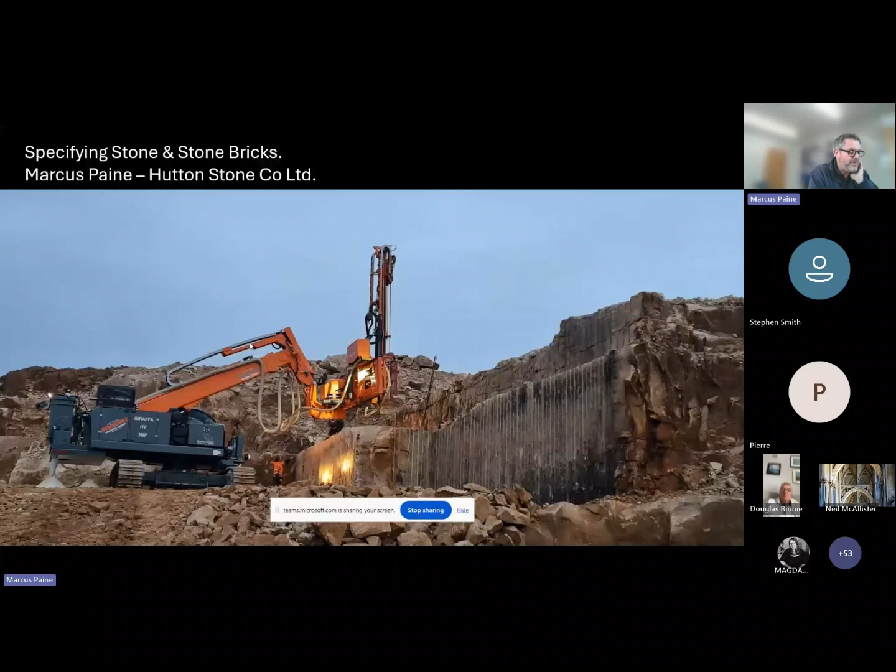Bearing in mind that this is a whistle-stop run through the subject in broad terms, I should first point out that right from the start, we humans have picked up pieces of stone wherever they were available and successfully used them for building things.

This again, in the UK as an example, should you look on any brick-pit map, resulted in an incredible and vast array of historic quarries, pits, mines and extraction sites across the whole of the country, providing us with the vast and varied built history that by and large surrounds us wherever we are and defines our heritage.

These, in the UK and elsewhere, were mechanised and further developed throughout the 18th and 19th centuries, and adapted as other technologies came to the fore, and only faltered and fell away from around the start of World War I, until they were, to a great degree, certainly in the UK, abandoned by the start of World War II, as social, political and other needs changed in conjunction with cheap and plentiful energy - that's cheap coal to you and I - boosting the credentials of other materials.

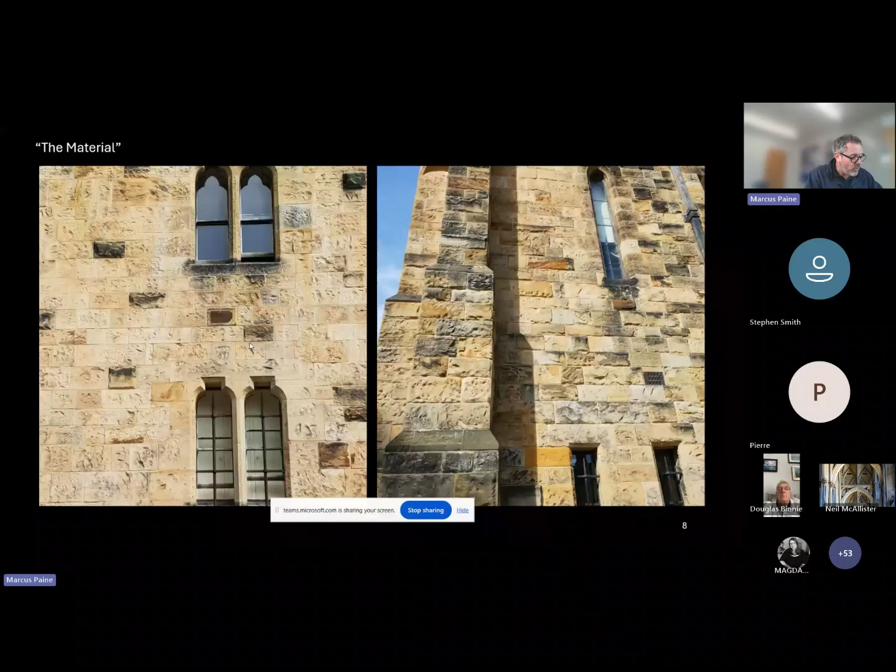These sawn blocks, all from the same quarry, the same face, even the same block, simply show in starkest terms what our built heritage may have looked like when first built.

And yet we know, because we have the benefit of hindsight, that given a surprisingly short amount of time, natural stone weathers in and tones down entirely.

So the lesson for the thrifty, sustainability-driven, enlightened is: when looking at natural variation in new, fresh sawn or split stone, be open to the material being aesthetically interesting or exciting, rather than the 20th century concern that it was challenging or concerning, which led to enormous selecting out and sanitization of this natural inconsistency.

Purposely rejecting nothing in terms of range and variation in a natural product utterly transforms wastage and product cost, and further lowers product embodied carbon score too.

In essence, the material should be judged by the well-informed with the allowance of seasoning and aging, rather than looking at palm samples of new stone and trying to control the outcome of a natural process that rewards the patient recipient.

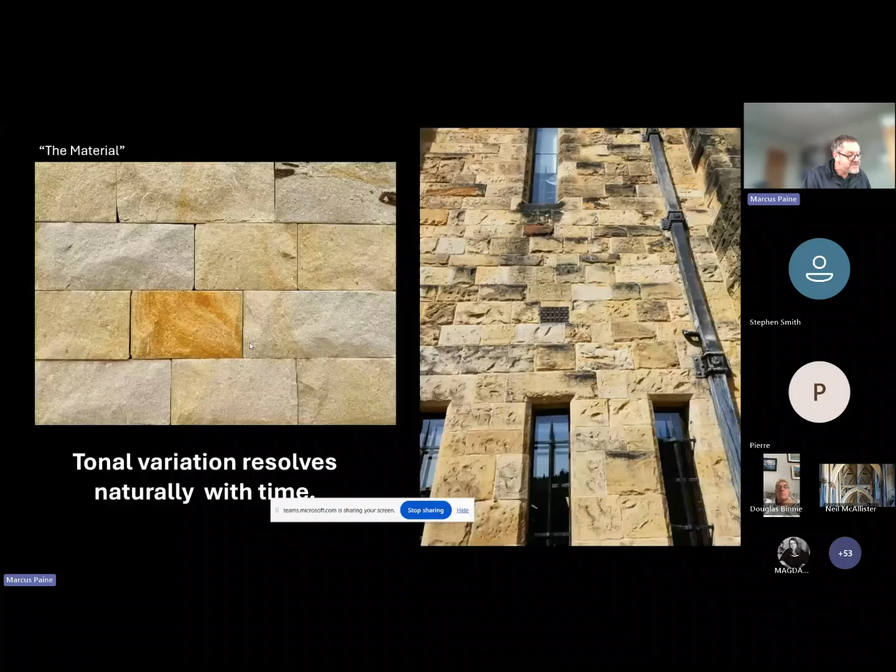So on then to a quick glance at quarries. Some managed to remain open throughout the diminishing of the industry as other products rose to the fore.

As stone has latterly found more popularity, albeit as a clean, thin veneer on more modern buildings, other quarries have again reopened. A small fraction of what previously existed, currently around 300 in total in the UK at the moment, but most with a long proven track record.

In Europe, it should be noted that whilst we in the UK chose to continually develop our taste for man-made options, the French in particular chose to revert back to using low-cost natural stone as the basic load-bearing material to great effect many decades ago.

This is a nod to history and sustainable material use. If you dig it, use it. Hence ashlar facades and rubble gables and rear elevations. It's all endlessly explained to us everywhere we look in our built heritage.

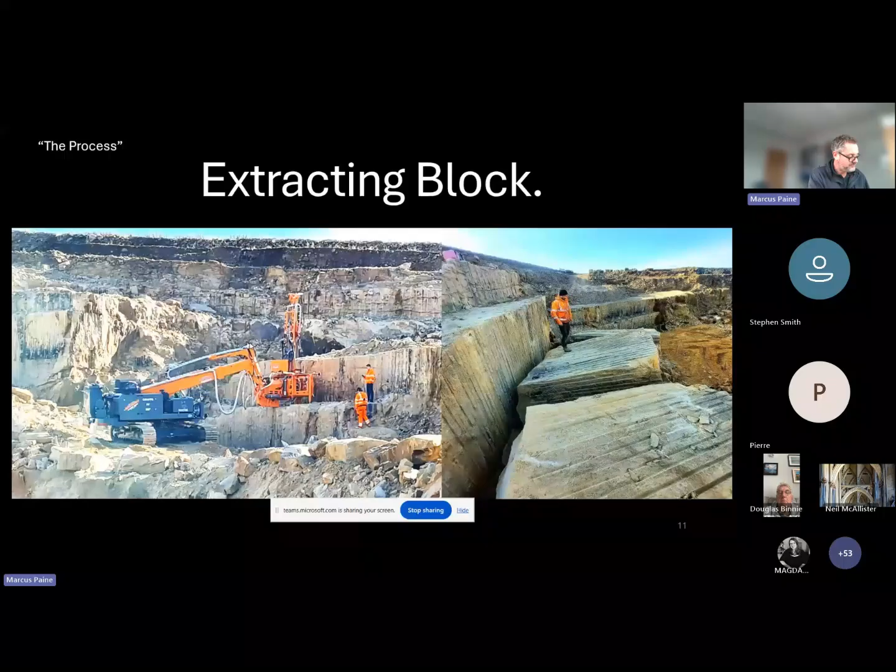Controlled splitting and techniques handed down the trade within all geology versions of extraction are not lost within this industry. It's just that they have not been required for a period, whilst the whole cost of making man-made stone equivalents has simply been irrelevant.

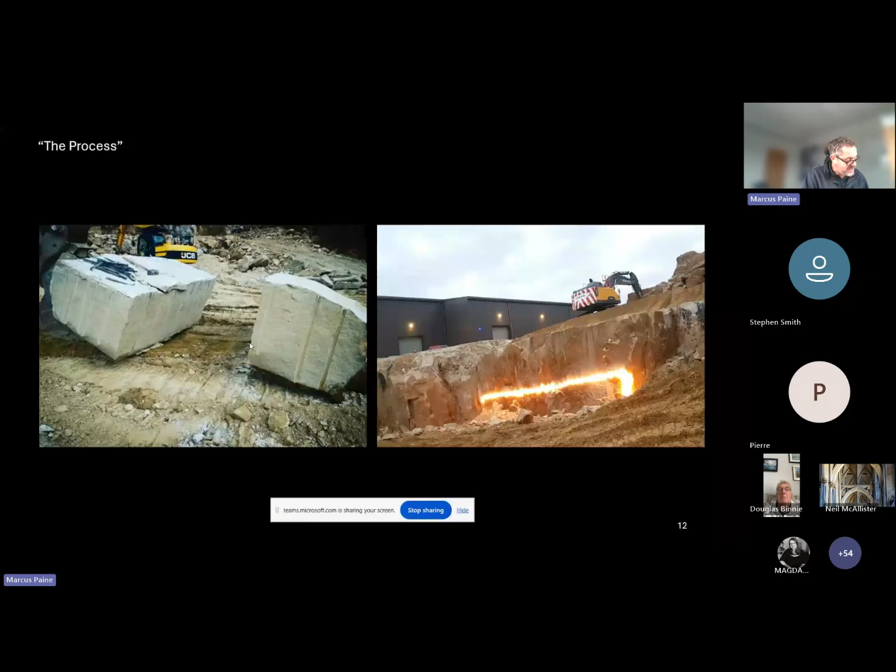Here we see controlled explosive splitting at the exact moment of detonation, which in this case yields a circa 120 ton primary block, and also a block simply split by hammer and hand using plug and feather wedges.

Here, the plugs and feathers shown in action, splitting the stone and the end result.

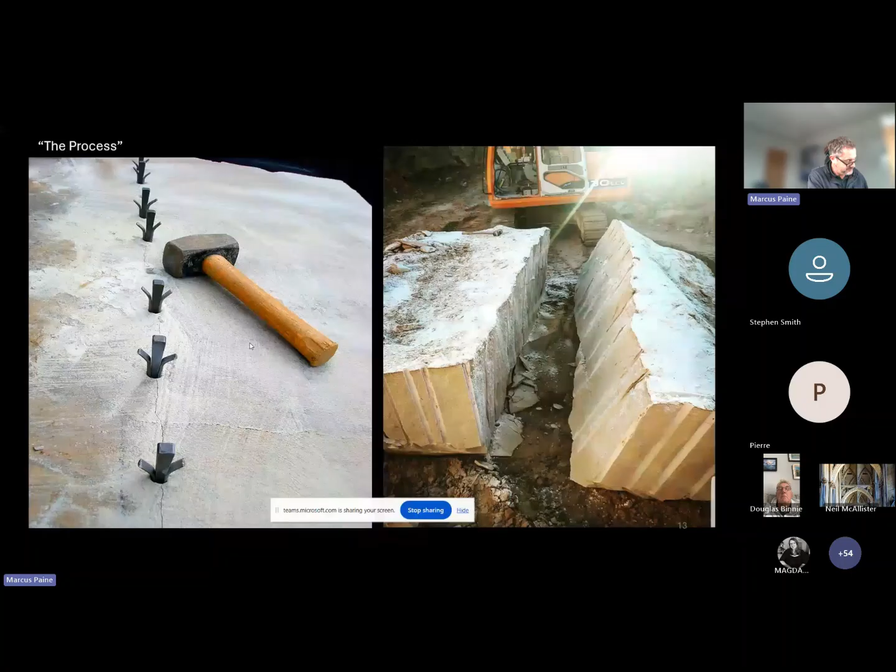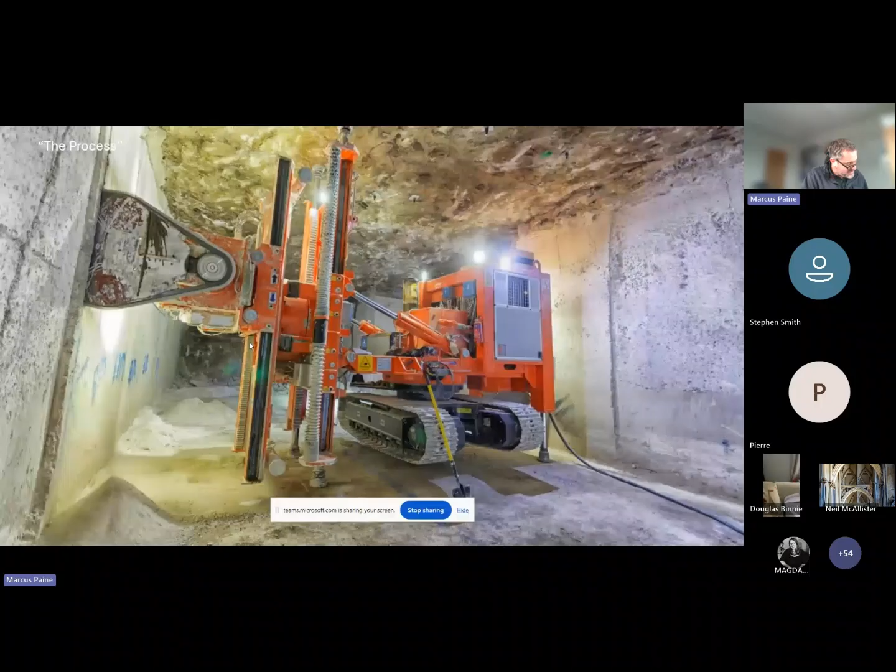Sawing clean base bed directly from the face, but also a host of other beds that are instantly and economically relevant if we accept the perfect imperfection of the natural material.

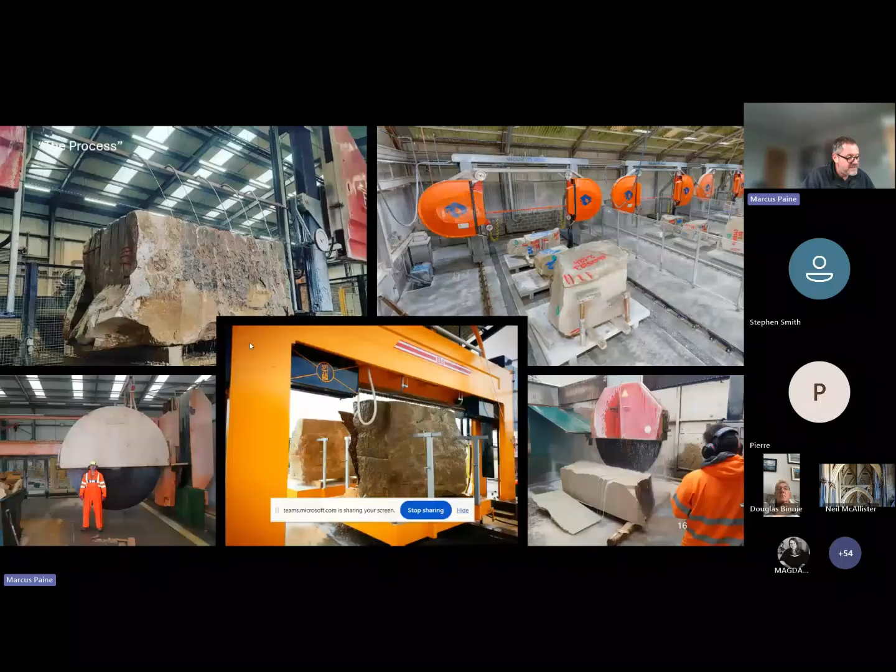Thereafter, blocks are selected for suitability and run through production facilities, producing bespoke and mass-produced products as required.

Primary block sawing—think of it like cutting an uncut loaf of bread from the baker's and making it into a sliced loaf. Economical wire sawing, now including complex CNC options, is a modern feature of our industry, aptly demonstrating how every block, big or small, is used for its appropriate dimensions. No waste—always the fundamental industry target.

And then with these slices or slabs of block, we turn them over and lay them on smaller secondary saws to either cut to final square dimensions or mill and shape as required.

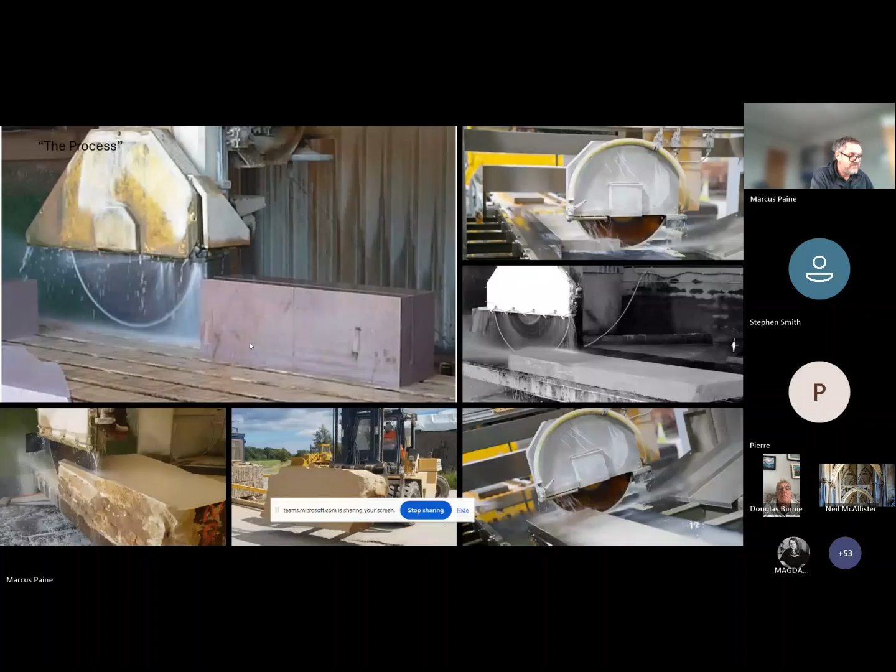Masoning: architectural features used sparingly but functionally to throw water away from the building. Surface dressings, often critical in heritage work, again perhaps used very selectively as a simple method of creating a front door definition to a building.

And of course, carving for those special pieces, all part of the story—sometimes now by CNC, but always where necessary by hand is of course still possible.

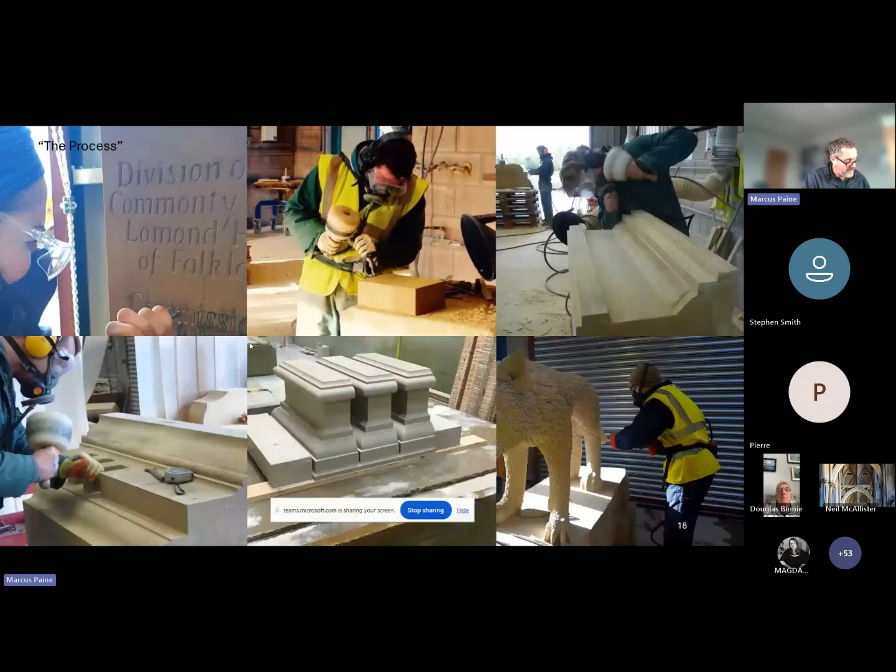And so that's where we are: in many ways a declining industry, hooked and feeding on endlessly bespoke niche items and restoration. My friend and colleague Pierre will elaborate on why and how the outcome was somewhat different for Europe.

And it leads us to understand why a few of us, somewhat disillusioned with the current status quo, chose to think outside of this box and align the principle of a mass-produced natural stone brick as nothing more than the 21st century version of a piece of Victorian rubble walling, in an effort to align concerns for our climate with our almost forgotten natural material in its most utilitarian form and how we perceive it going forward.

In terms of specification, and in the current construction cycle, where cost and specification is often manipulated, this bespoke nature of what we are asked to do is often at odds with the program or the control of it in any project.

We would simply say that in terms of specifying natural stone for your project, embrace the ideals and lessons of the arts and craft movement. Understand the material, engage early in the process with your chosen supplier. The nearer you can get to the source, the more likely you are to retain control of schedule and cost—and the more people you have in that supply chain, the more likely you are to be frustrated.

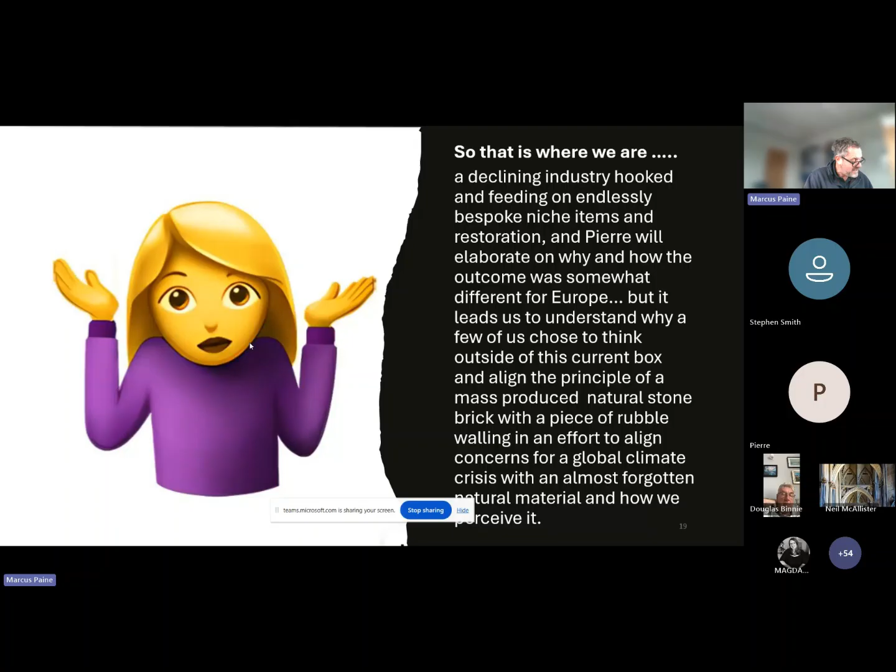So the stone brick journey was initially inspired by hearing Pierre and Amin Taha on a Stone Federation talk chastise the UK stone industry for its failure to develop and its inability to be competitive with imported alternatives and man-made options. Whilst I observed many of my contemporaries smart with indignation at the suggestion, I, having spent my career very much in the thick of it, felt this really resonated with my feeling that my industry had sleepwalked into this perceived position really since the World Wars, where we societally rejected much that had gone before in favour of various high input, quick, convenient economic alternatives that ultimately also led to short-termism within our buildings.

And whilst that was in many ways fair enough, it had no reason until now to consider the climate outcomes of the high input energy needed to create the products that gifted us the way forward.

It really was about embracing the idea that the mass production of one building unit, which the clay brick industry had so successfully done, and in so doing had eclipsed the natural rubble walling market almost entirely, could, as an entry point, reinvent the general perception of natural stone—now not just for the beautiful bit of a building, but like rubble before it, for the most basic, cheap building element and low embodied carbon too.

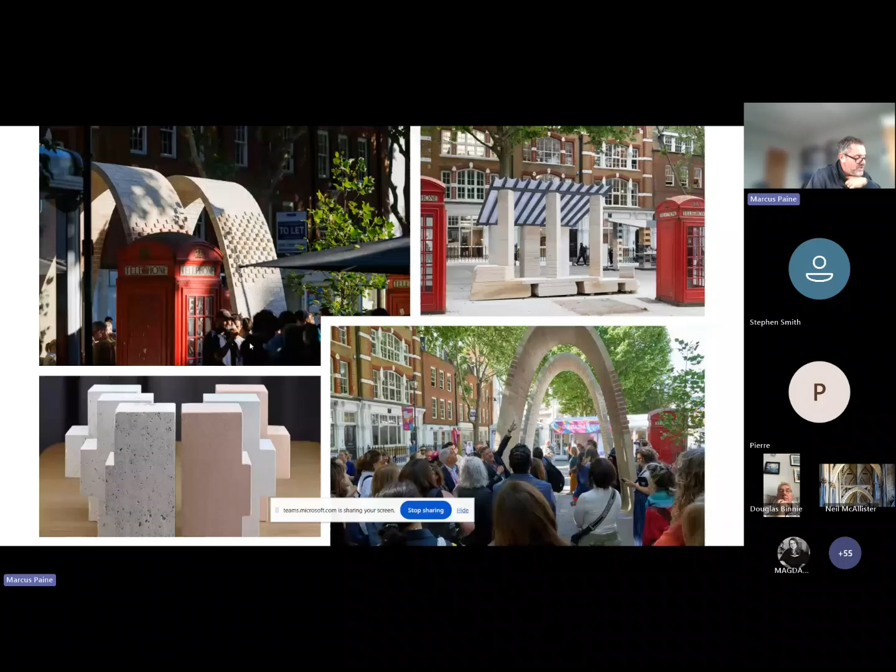We hosted and supported many talks, tours, visits, and collective groups supporting student learning and studies, and simply broadening the conversation away from the current perception that natural stone is an elite, high-end, expensive luxury. That is only one part of its story, and the rest was simply forgotten during the remains of the Industrial Revolution and the 20th century.

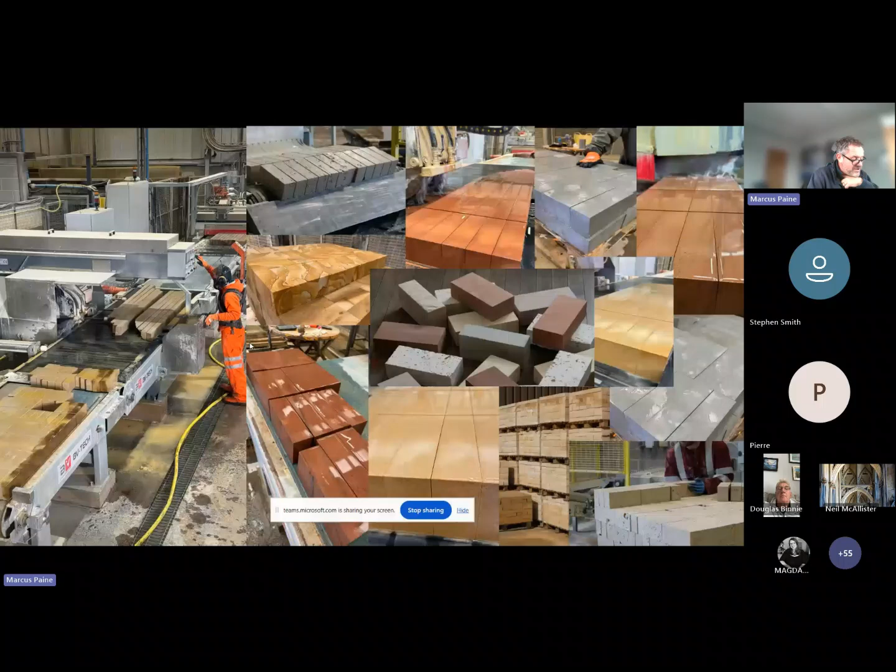We invested in significant new equipment and developed engineered solutions to create lines for mass production as close to mineral source as possible, to ensure that costs ultimately will be low through economy of scale. And we have begun steadily progressing some really interesting projects with clients, mostly inspired by both the exhibits and the growing conversation throughout the architectural and construction industry.

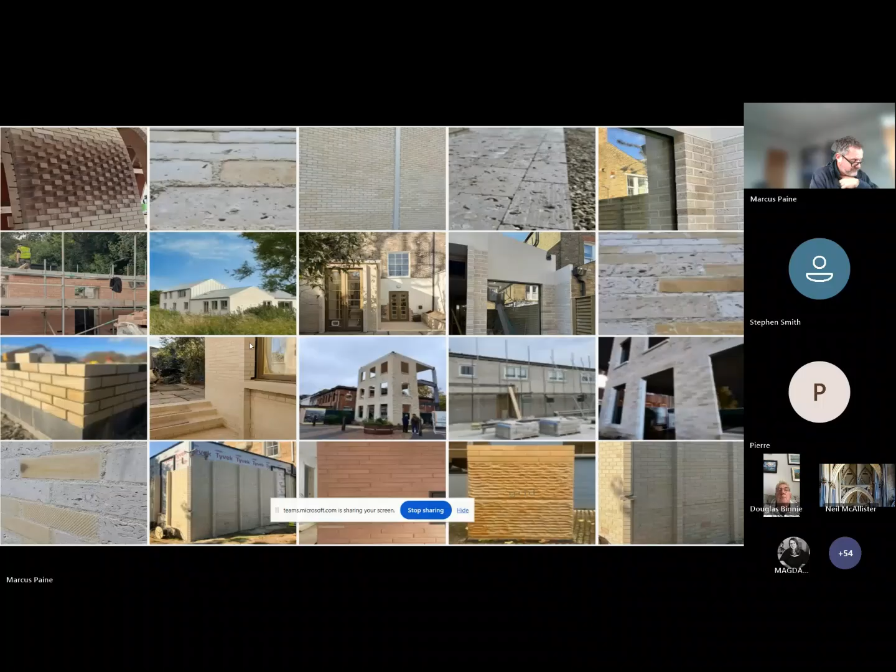With inspiration from post-war Europe and occasional load-bearing examples built in the UK over the past few years, and of course Groupwork's Clerkenwell Close and Finchley Road extravaganzas, plus the recently unveiled design centre Earls Court Stone Demonstrator project, built with a 90% reduction in carbon by Pierre's Stonemasonry Company, using natural stone exoskeleton beams, floors, and clad in UK natural stone bricks to demonstrate the future in natural stone.

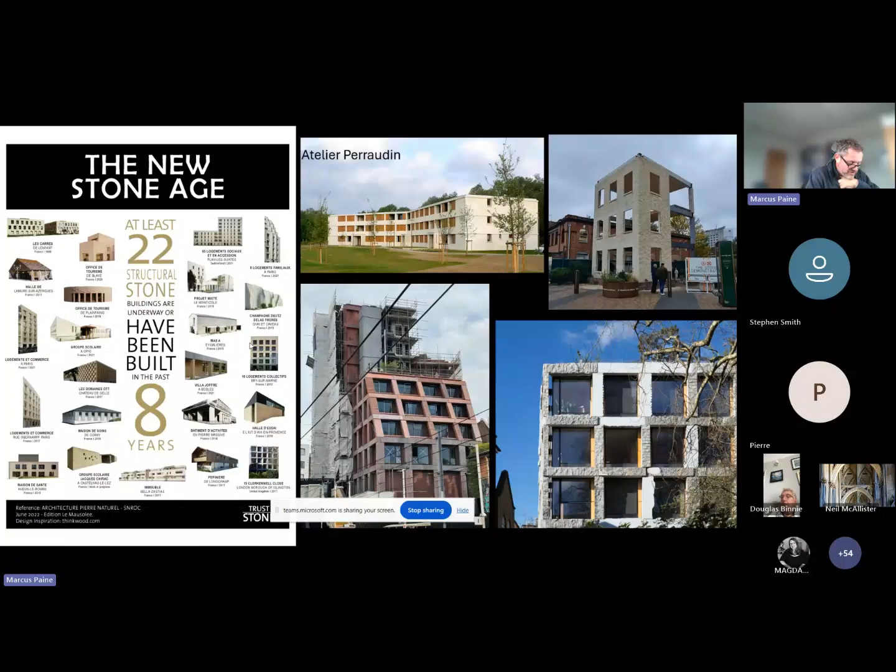We feel that a new generation of perception continues to grow. And we thank you all for allowing us to share this further with you today. Thank you very much for listening.

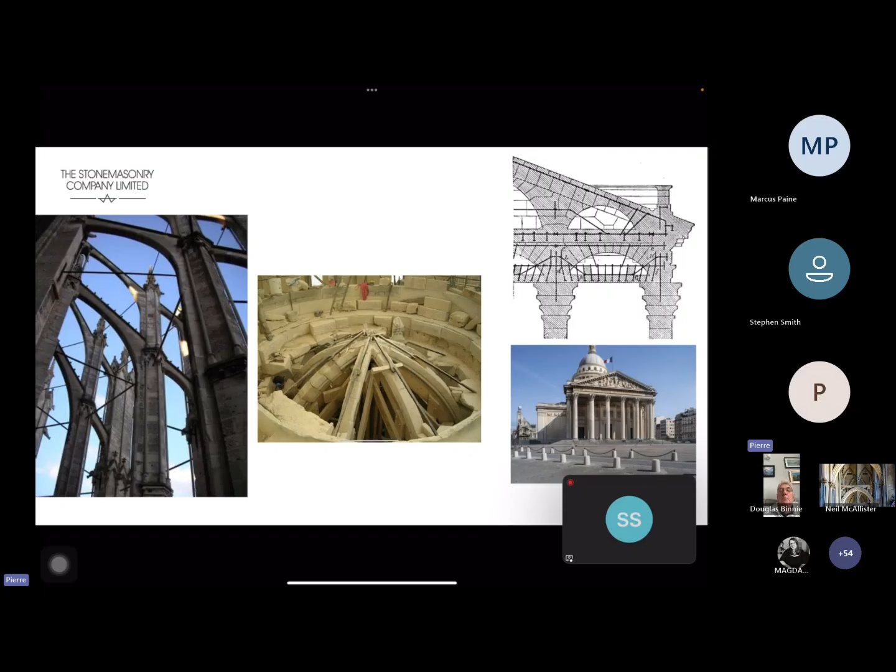You can see on the left-hand side the back of Beauvais Cathedral with iron bars stopping any wind loads from toppling the flying buttress. You've got an interesting placement of iron rebars in Château de Vincennes. But also, if you go to Paris and visit the Pantheon, you will see as well a network of reinforcement using rebars made of iron at the time, showcasing how people started to see stone as a material that could be reinforced with other material.

And here I can introduce you to Mr. Freyssinet. For people who don't know him, he is a French engineer who decided to push the market for reinforced concrete using post-tensioning of cables into a concrete structure, whether floor slabs or bridges. The system is very simple: if you take a lump of concrete or a lump of stone, they are both very similar systems, meaning they work very well in compression.

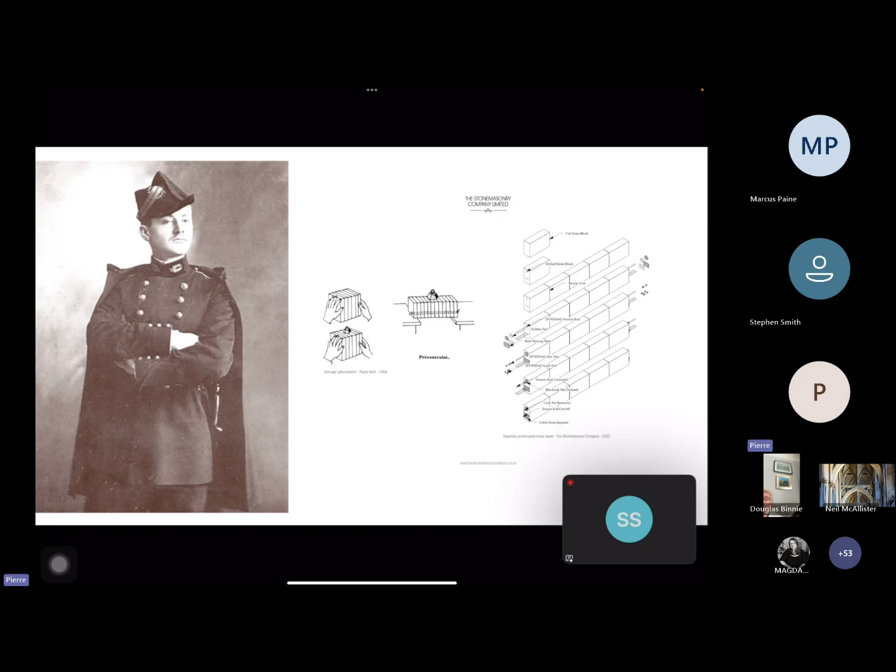So if you can do that with concrete, why not do it in stone? As in the very last pictures on the right-hand side, you can see the sort of system that we put in place and standardized to a point where you could get beams, columns, and so on done with exactly the same system of prefabrication. That was very popular.

That was an idea popular in 1950s France. On one occasion, because of the popularity of reinforced concrete, they tried to make it valuable into the stone industry, and as such, they did an 8-meter long beam in the 1950s with exactly the same premise of having a cable and rebars going all through this beam, tensioning the cable and compressing the material. It went really well.

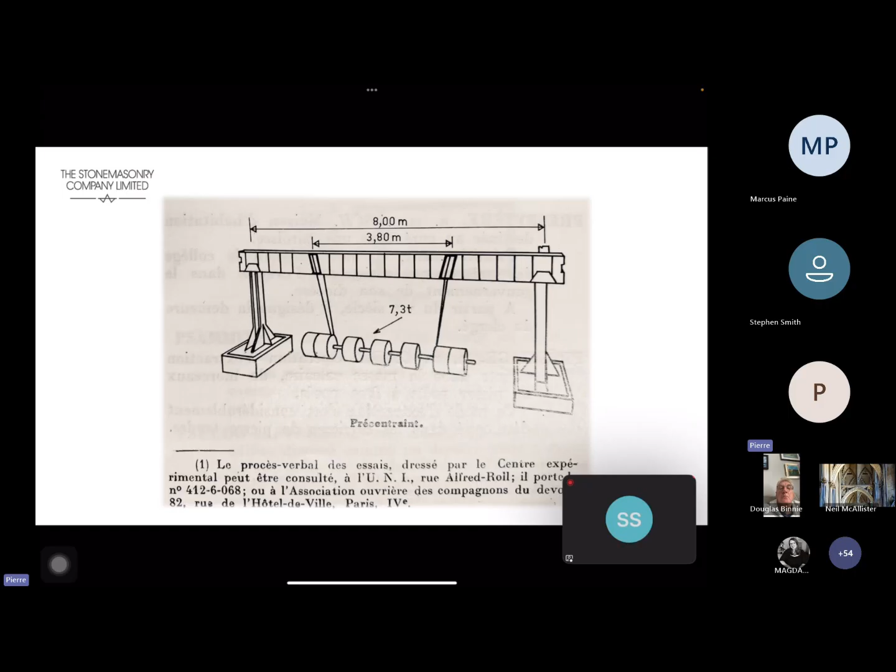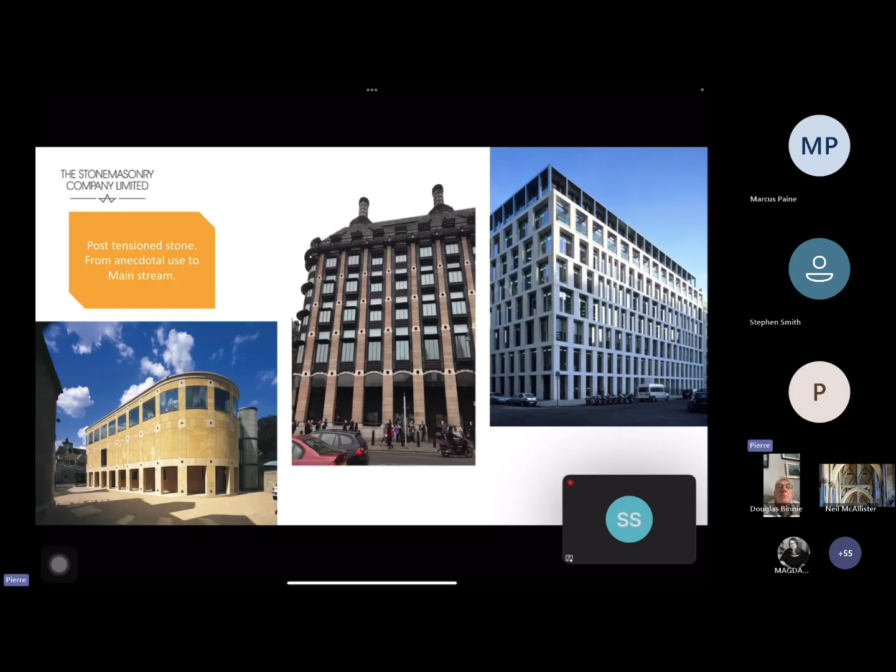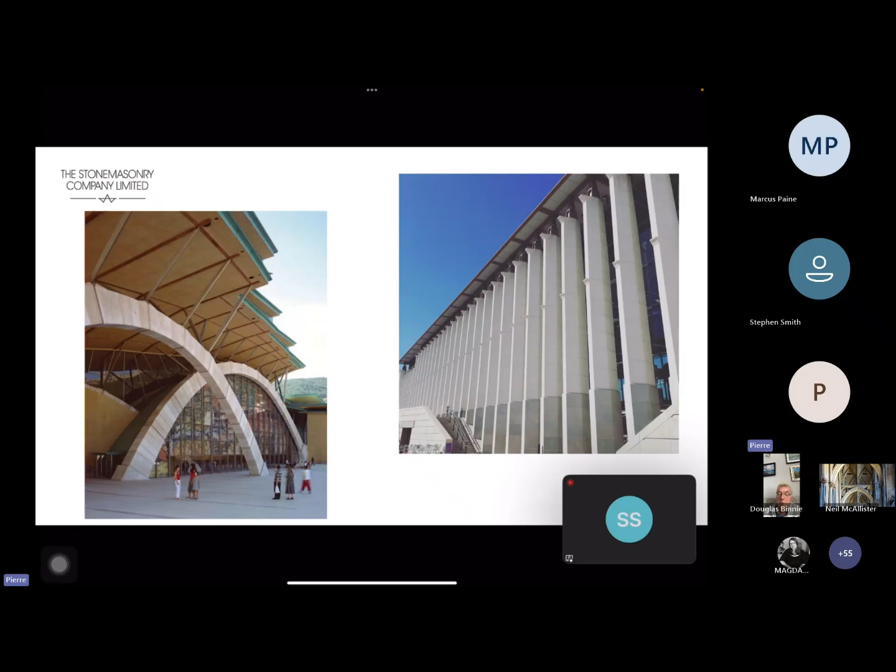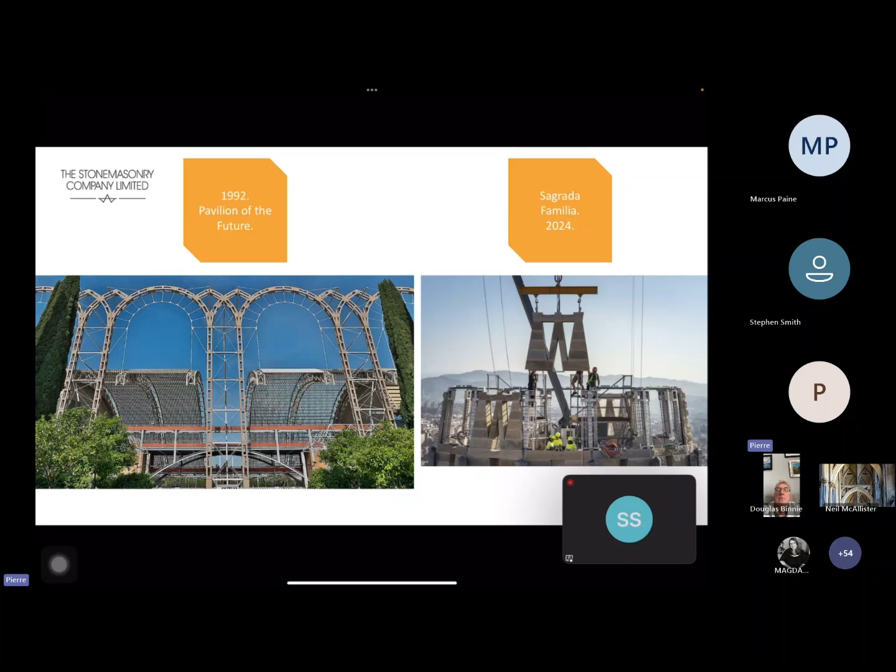And finally, Arup again in 2024, finishing the 7th tower made of sandstone collected all over Europe, again all prefabricated. This showcases how reinforced stone and prefabrication is key to putting stone back into modern construction—stone as a commodity, not a luxury. That's very much something we've been trying to push in the last 15 years.

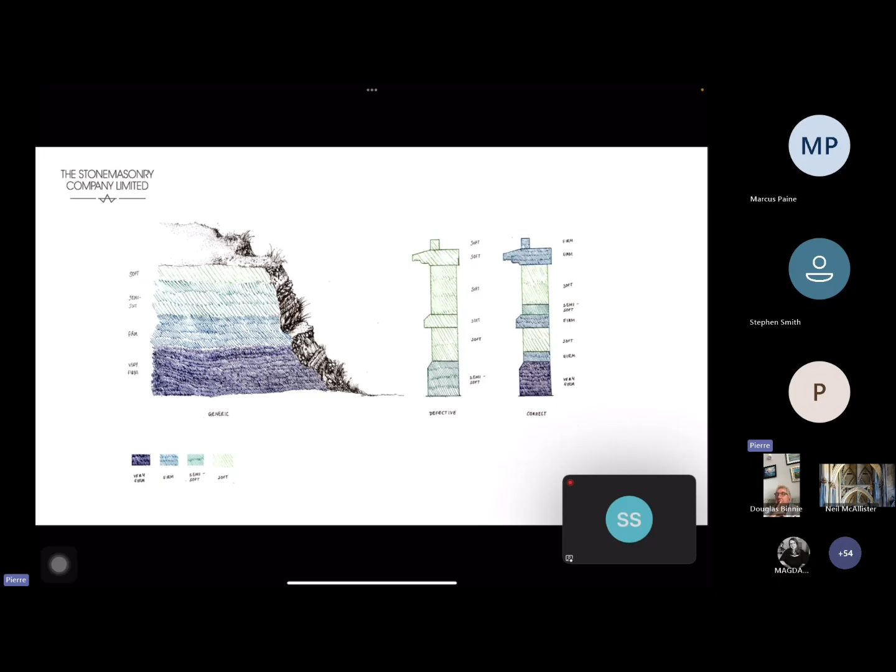I think what's interesting is that when talking about stone, as Marcus was saying, they are all very much local quarries. Pre-1900, architects and engineers used to have very good knowledge of local stone and were very intimate with the material, able to specify that firm stone should go into the plinth, maybe also into the windowsill, but other less demanding parts could be made in a softer bed of that same quarry. Specification is key, and as Marcus was talking about, there's also the aspect of the stone changing from the front of the house to the back, something we've been losing in the last 30 years.

We've been going a lot more for grade A, super-selected material used for surface finishes, cladding, and flooring, either by having concrete getting a lot cheaper, and those other grades—grade B, grade C, grade D—disappeared.

But if we were going to be a lot more intelligent in the way we extract our stone, we could use prefabricated stone for grade B—stone that could be pitted with some veins and so on. Then the large format grade C could be the result of a stone that allows a bigger module. And finally, grade D would be, as Marcus was explaining, making very sustainable brick. With these four grades in place, it would allow full use of the material instead of concentrating only on grade A.

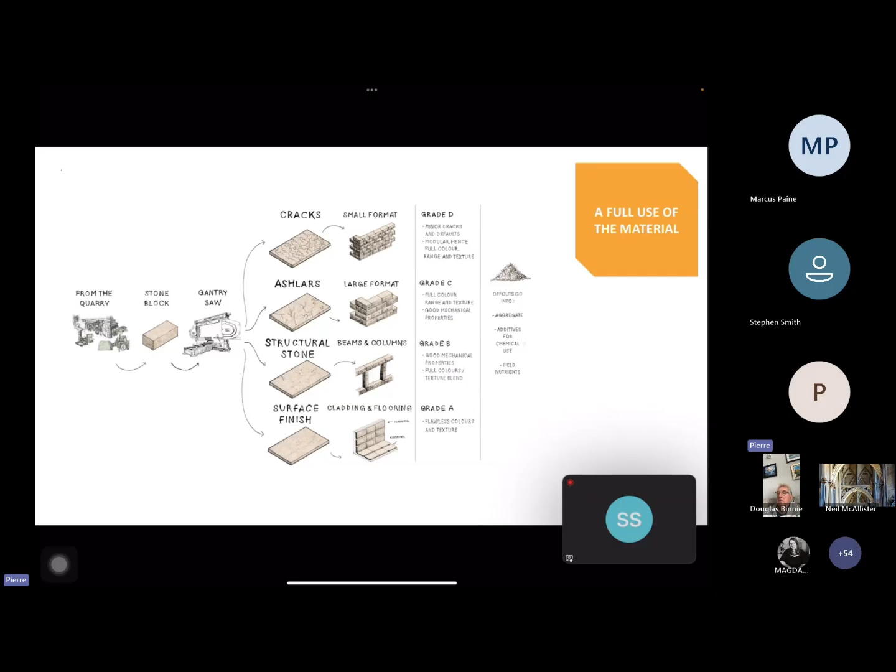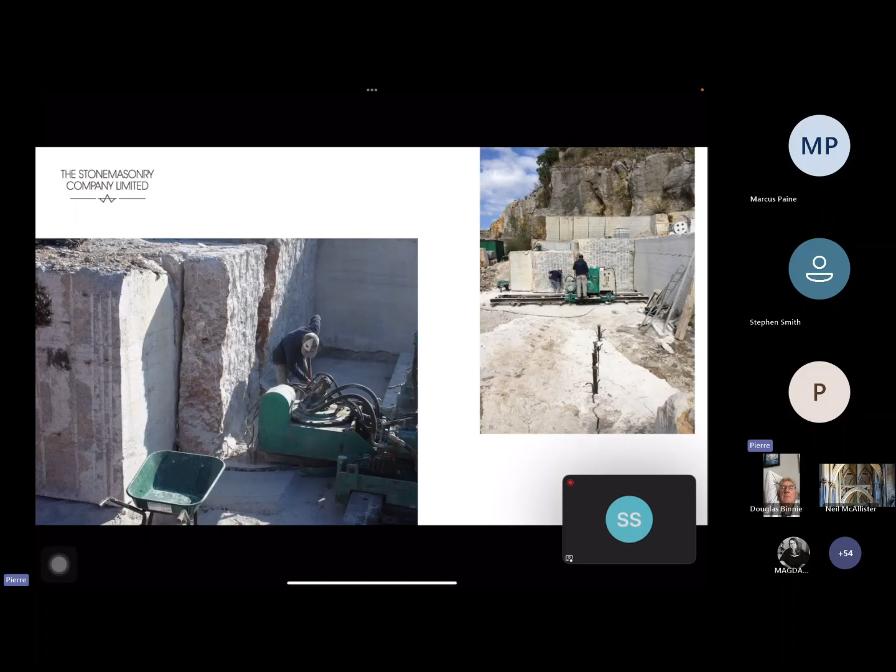And that's very much what we did with the Clerkenwell building with Amin Taha Groupwork in 2016, is that again, we had the possibility to use a quarry where we could get big columns and big lintels, and instead of cutting them in small bits to suit, for example, a local context, which might not be relevant anymore, why not take those columns and those lintels as one monolithic element and just bring them to build an exoskeleton?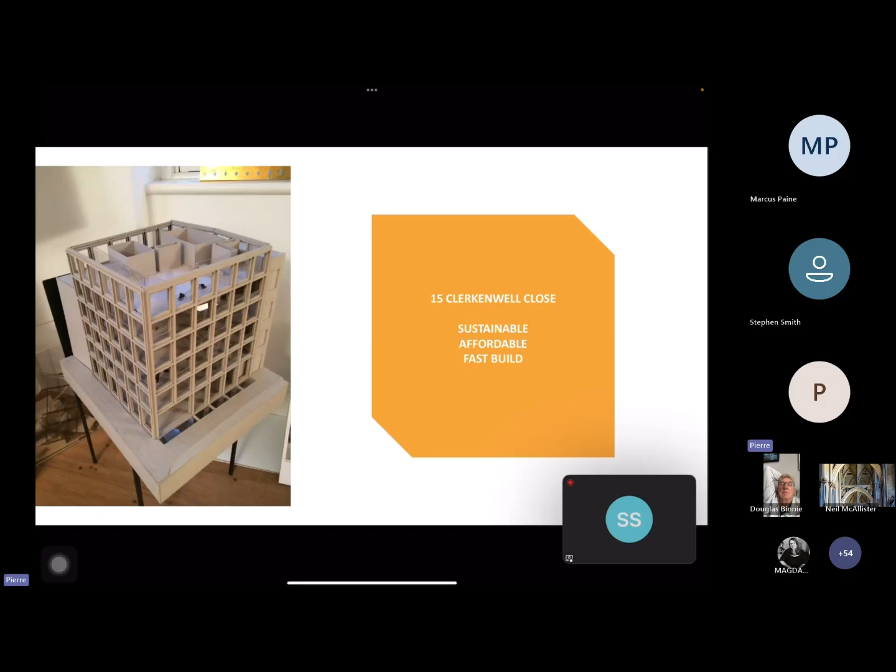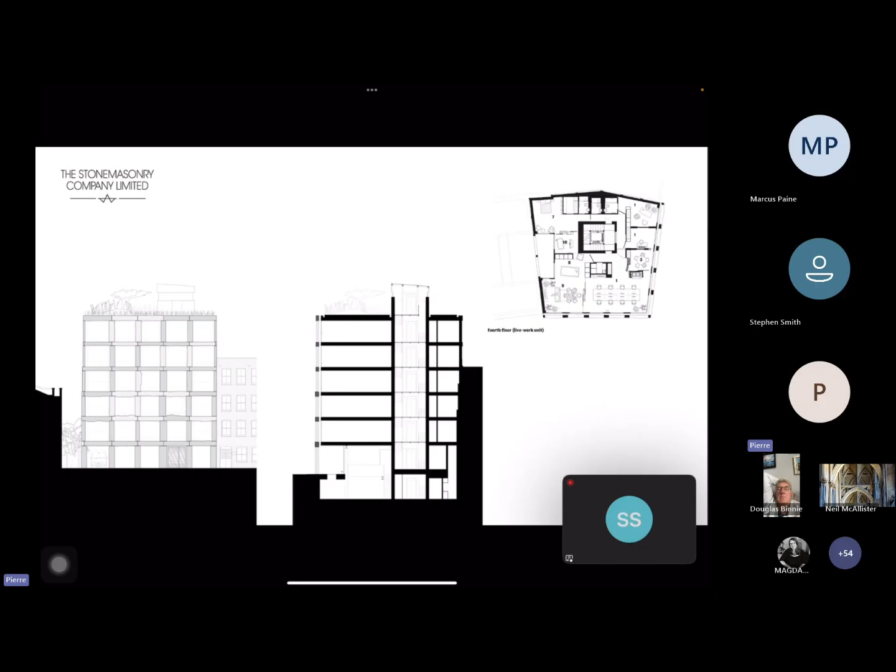And that was the mission that was given to us, to bring a sustainable material, affordable, and that could allow a fast build. So that Clerkenwell building was made as an exoskeleton. So you've got an exostructure, which is all load-bearing stone, and connected at the nose of each concrete slab, which means that from the front of the building to the core, to the lift shaft, you have a totally unsupported structure. It is all held on the exterior by the stone lintels and columns.

And again, to make it affordable, we followed what has been in France for the last 40 years, a material totally untouched after being cut. So as soon as it will be leaving, for example, Marcus' yard or our yard, there will be very little hand finishes that allow you to be a lot more efficient in the present, much more efficient cost-wise when building that affordable scheme or community center.

So on the left-hand side, you can see a French building built in the Southwest, where again the architect has decided to leave the tool marks. They are the tool marks of our time, you know, big circular saw. In the middle, it's a 1950s France building, this simple affordable housing scheme. And finally, on the right-hand side, it's Clerkenwell Close. This is the echo of the blade of the wire going through the stone and just being left totally untouched.

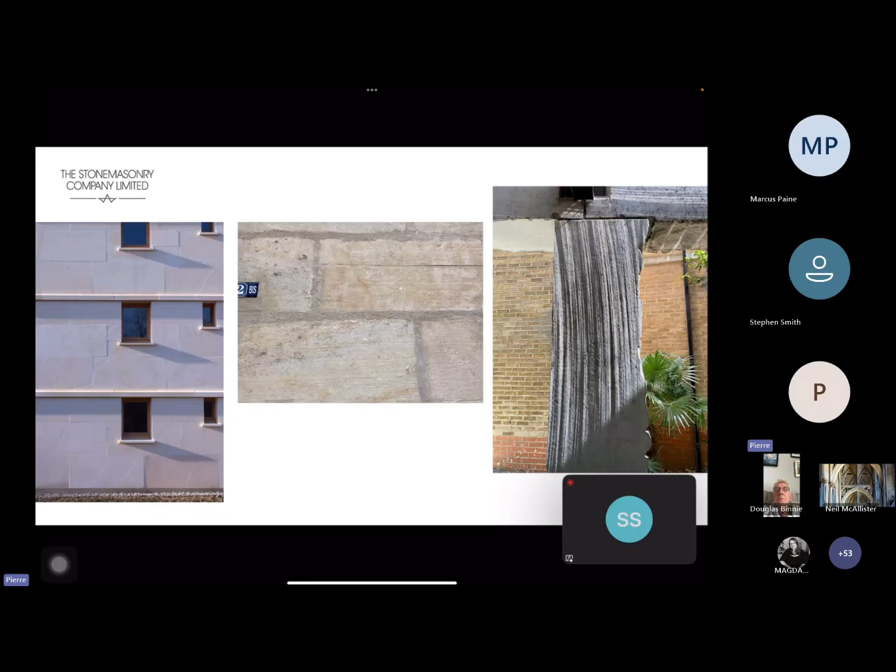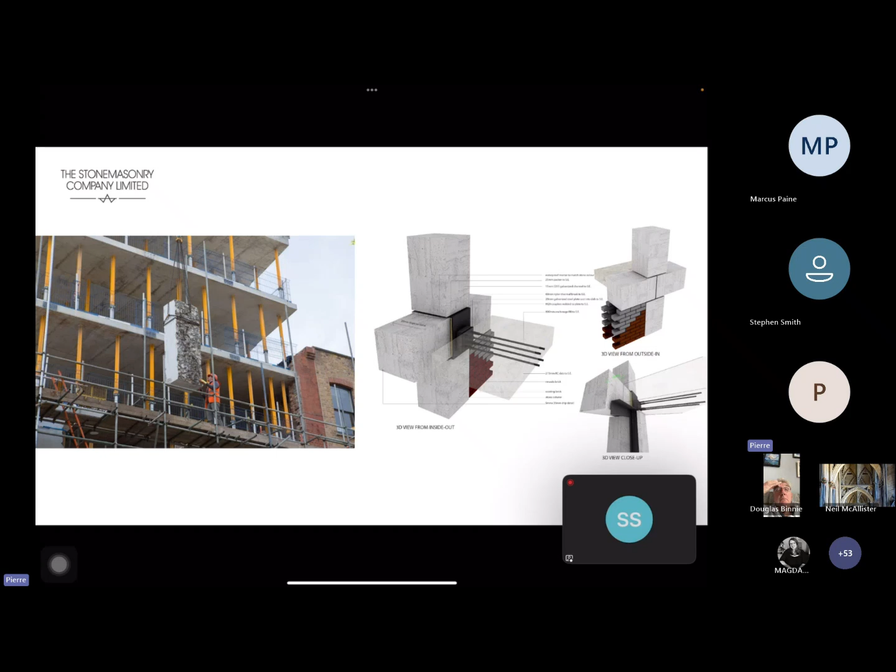So here you can see we've got the sort of natural prefabrication of monolith because these ones are not reinforced; they are just columns coming out of the quarry, and you can see the black box on the nose of the concrete planks, the concrete floor that's going to be connected to the exoskeleton. So here on the left-hand side, you can see the connection from the nose of the concrete floor slab to the back of the stone, and again the lifting of one of the monolithic elements.

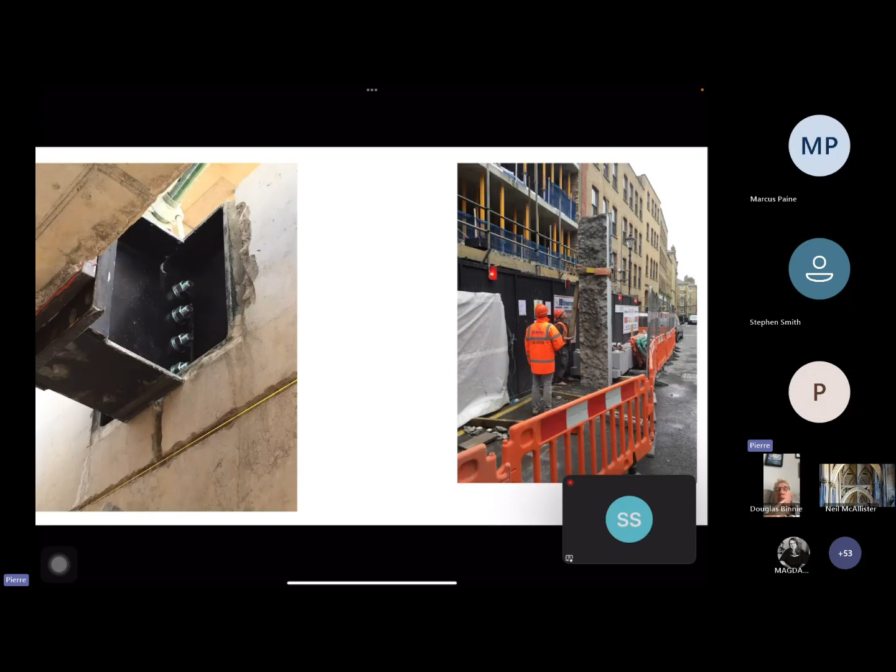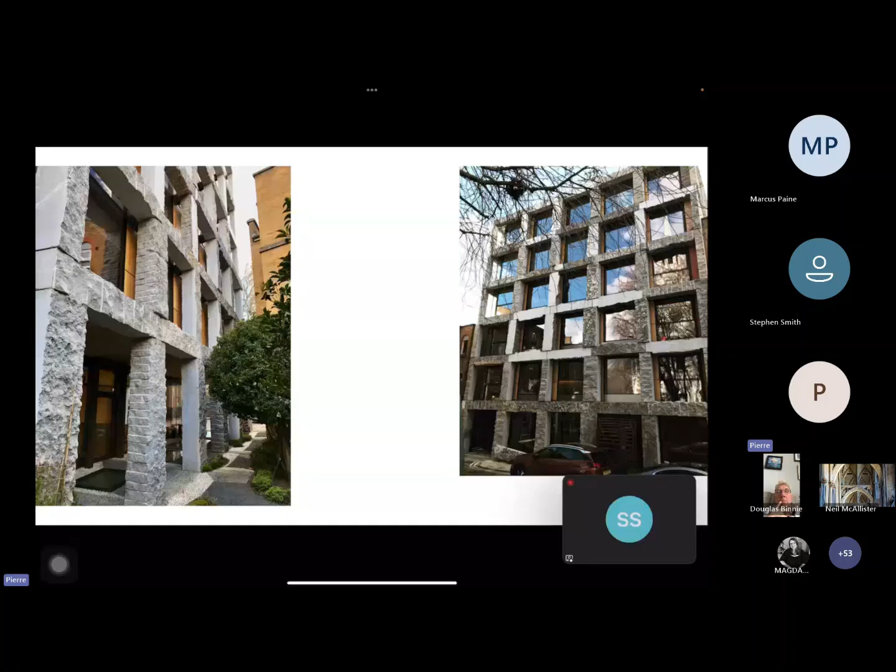So this is a local limestone to Lyon on the Rhône. So here you can see a very efficient use of stone, only 100 cubic meters of stone, which is a very small amount of stone that we've borrowed from the crust of the earth. So again, a very efficient way of building, requiring very little water, because we use mostly grey water in a closed circuit. So that means the mobilization of water is very minimal. So for some key areas where you might have a drought issue, that could be very useful. And here you can see the project in central London.

So I think, again, as illustrated by Marcus, we tend to say humans are made of water, 90% of water or something like that. But I think modern humans are really made of oil. And I think in the last 100 years, we have seen us getting more and more hooked on oil and fossil fuel. And there is an interesting parallel between 1947 France and 2025 worldwide.

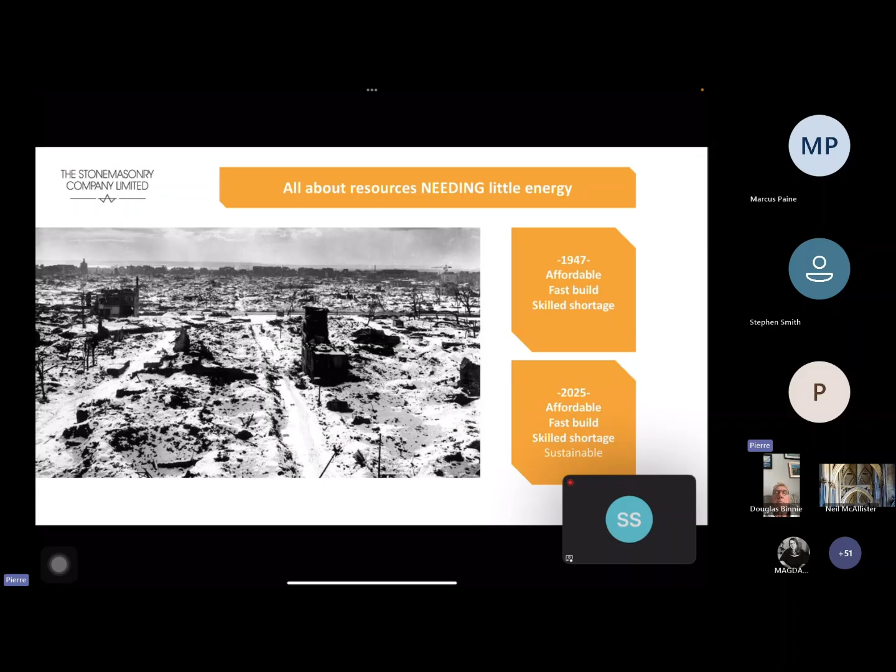In 1947, as we needed to rebuild France using as little energy as possible because it was very expensive, and wanting to use concrete and steel where it matters, which means mostly in infrastructure, building bridges, harbors, tunnels, and so on, they needed an affordable and fast build and a material that didn't need a huge amount of skilled labor force. And in 2025, we are very much exactly there, with this affordable material that could be built quickly with, unfortunately, less and less skilled workforce. And of course, we want our buildings sustainable.

I think all here on the call, we all know how processed our materials are now, be it food or construction material. Everything is over-processed, everything is overcooked, overworked. And compared to letting the earth do that processing for us, why don't we stick to stone? Stone has been processed by Mother Earth in the last 135 million years. We might as well use what is already there, requesting as little energy as possible.

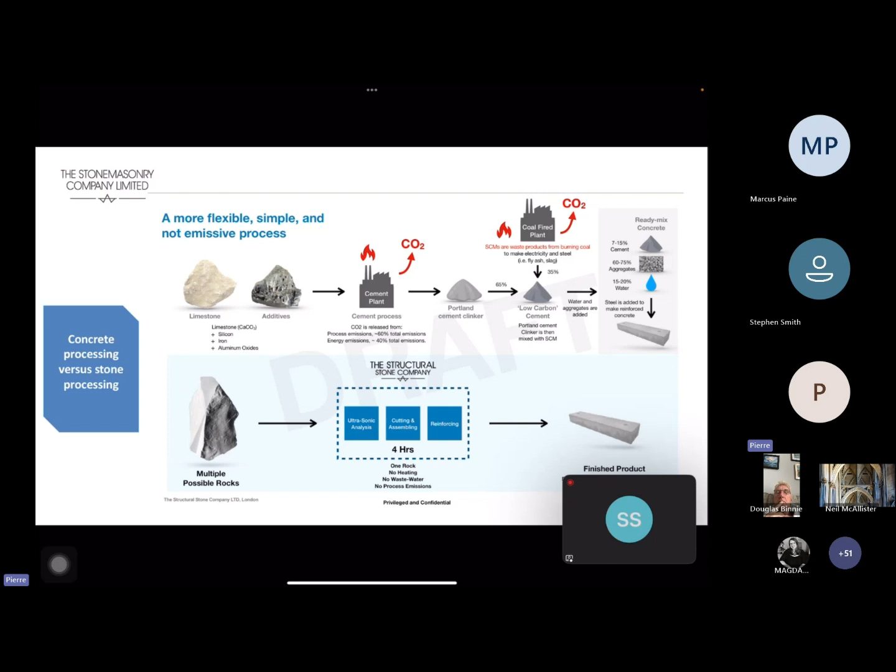And I think that's what happened to France in 1950. They just found out that 225 kilos of coal was necessary to produce 1 cubic meter of concrete, and 10 kilos of coal for just 1 cubic meter of stone, which, when you look at the difference in cost at the time, made it very, very cheap to, of course, build in stone.

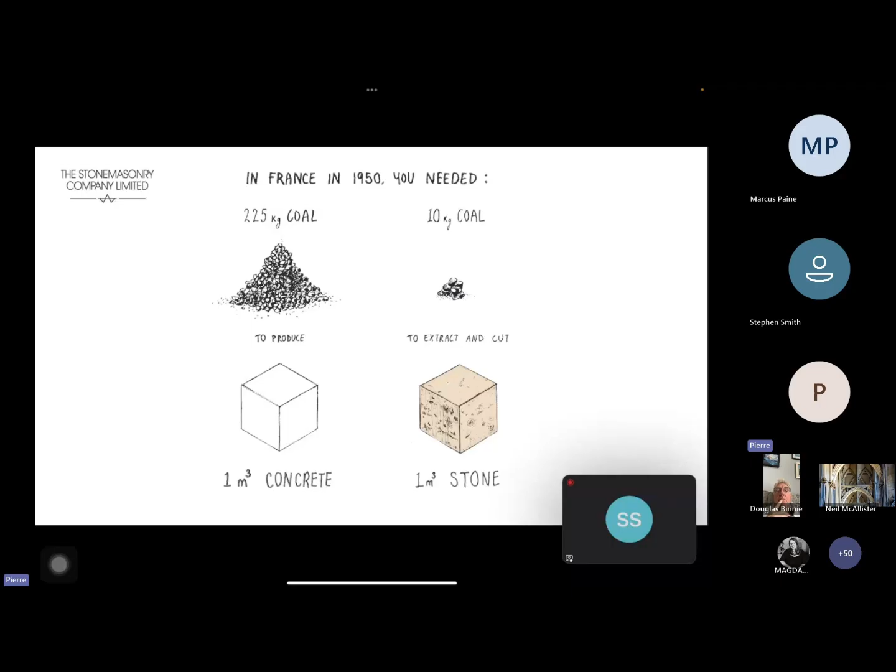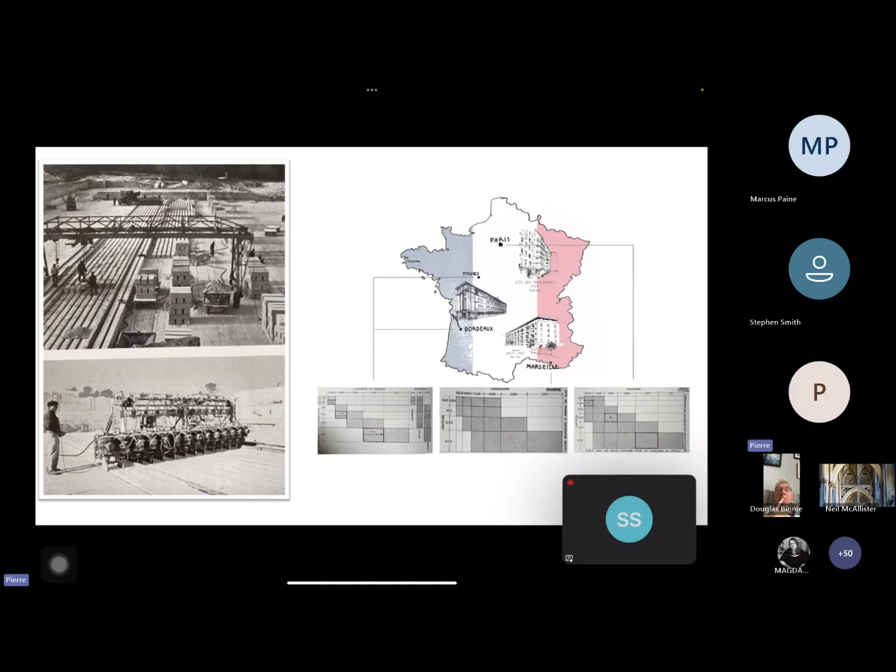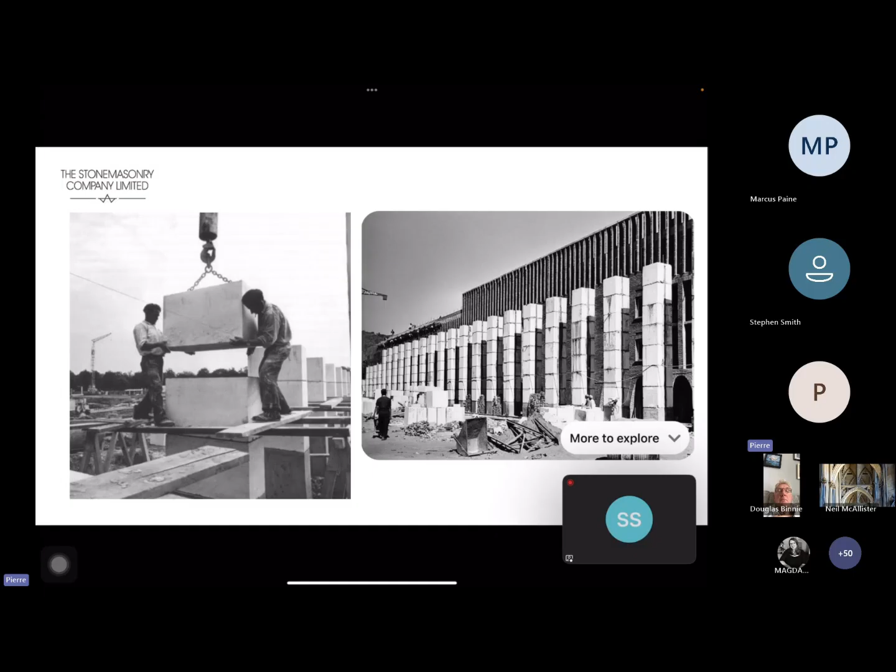Here you can see a typical site in France in the 1950s. Again, that's the architect Fernand Pouillon. And here, all around France, mostly southwest, south, and northwest, you can see how France was using stone as a load-bearing material and in its facade. All that is 1950s to 1970s stone building.

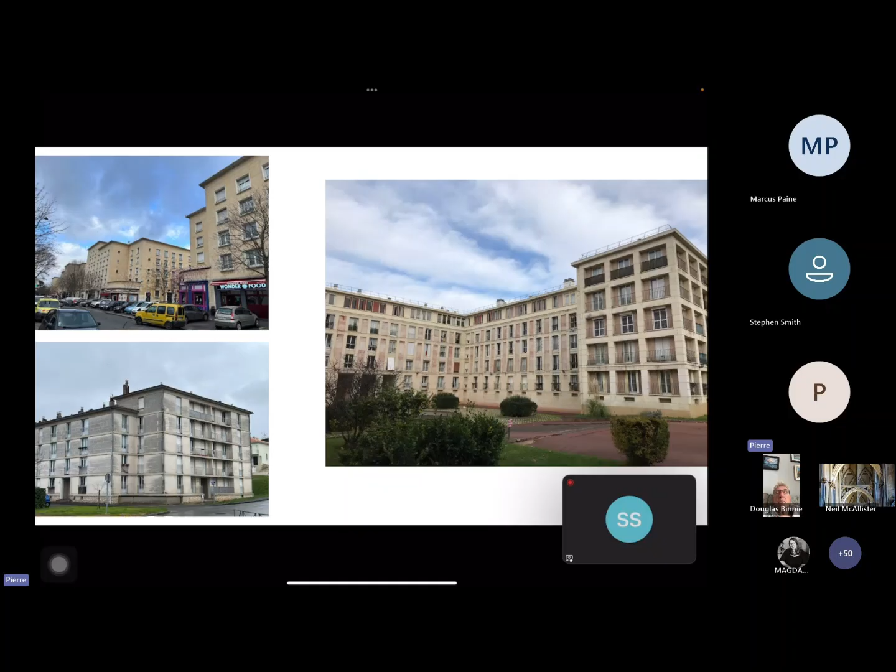So stone is loved in France because since the 2025 new policies created by the government of at least 50% of material coming from sustainable sources for new construction, with wood, it has been one of the preferred materials to cut use of fossil fuel and decarbonize modern construction. As you can see on the left-hand side, the stone being cut at the quarry, sent to the gantry saw, then loaded on a truck and sent to be fitted on site.

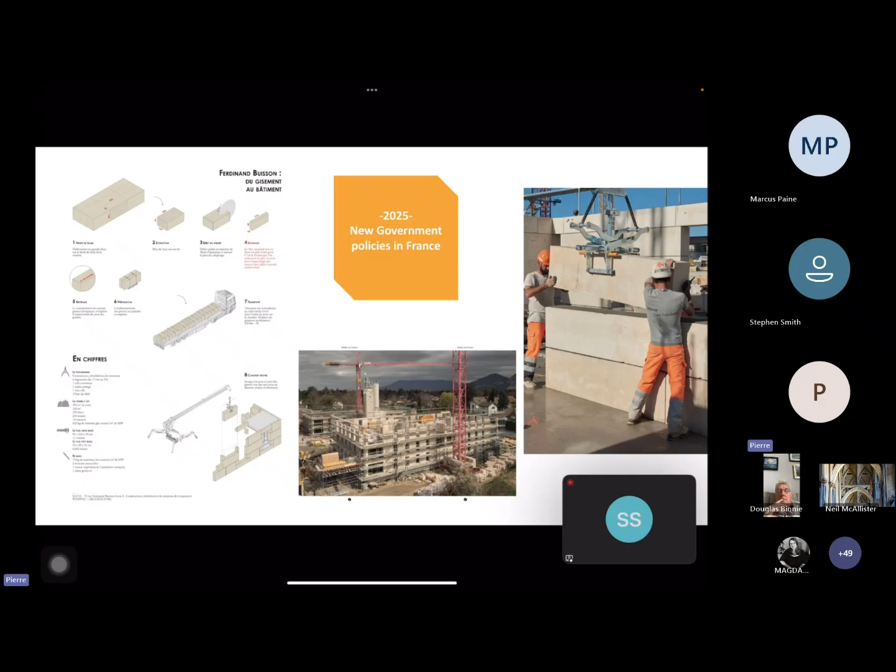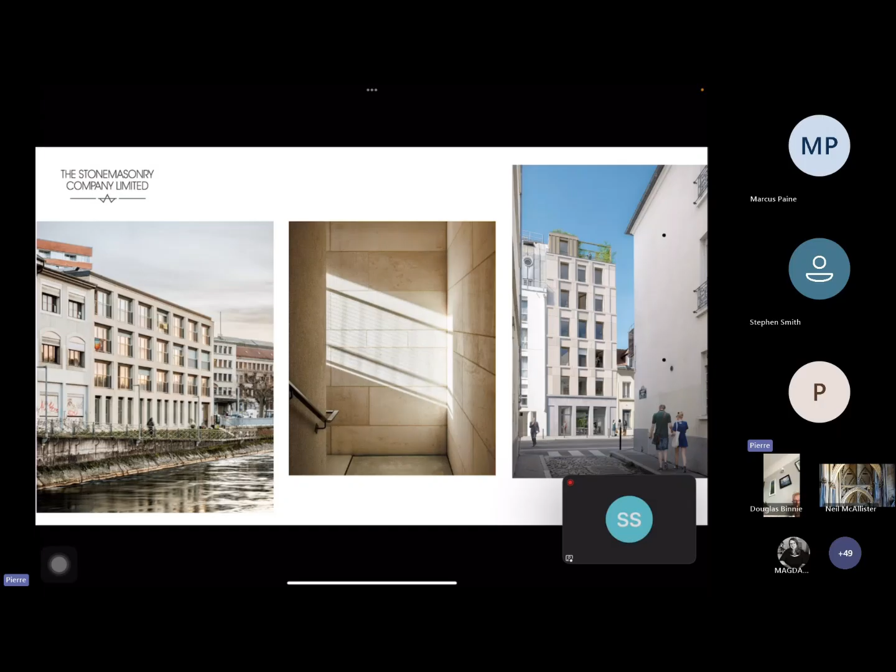So all over France, you see some beautiful natural stone structures being created, all being structural, all being also cost-driven. Those are sustainable building community centers. They are very much buildings where cost is at the heart, and as such, most of the studies are showing a very similar price, if not sometimes lower than a concrete structure clad in stone or other material.

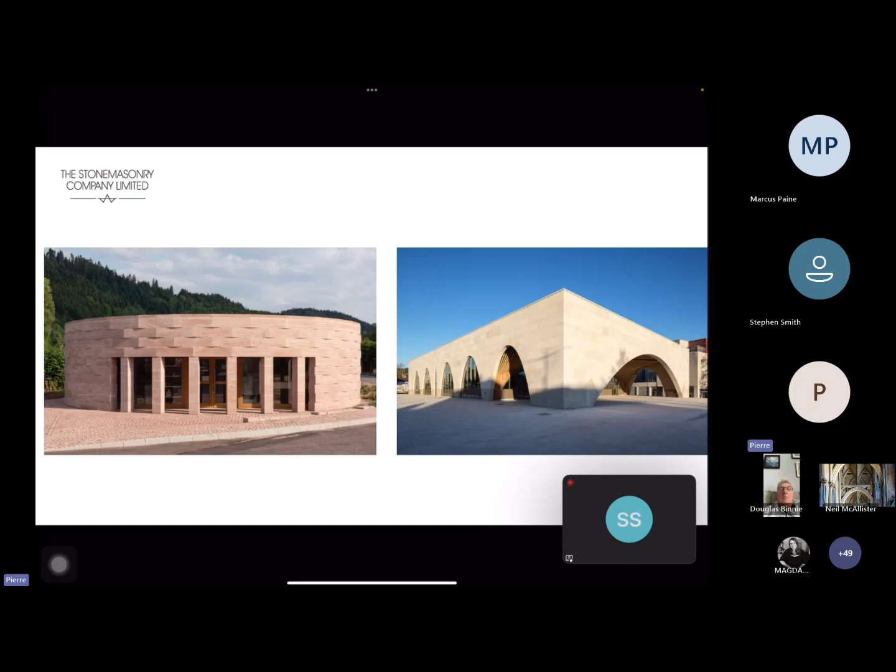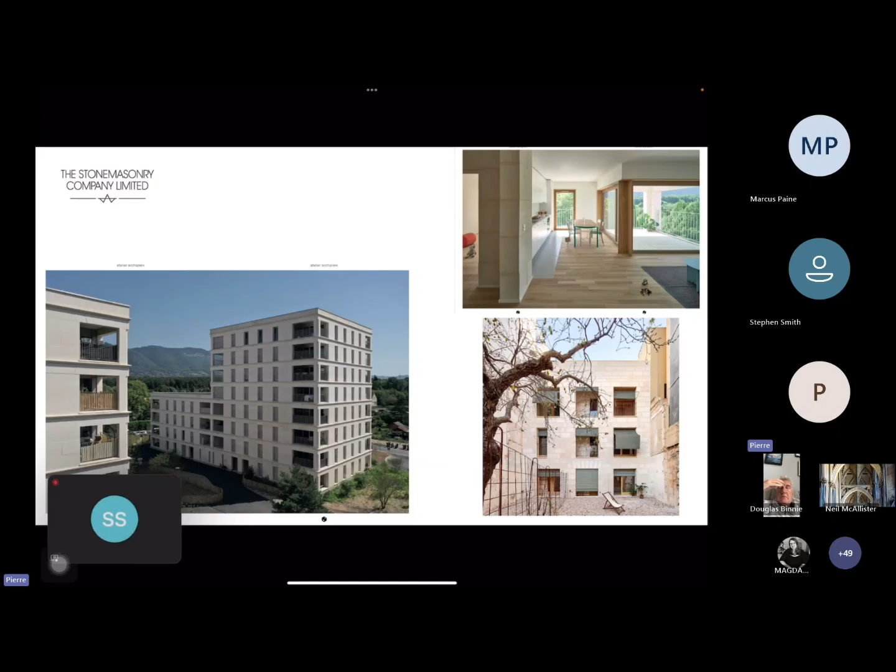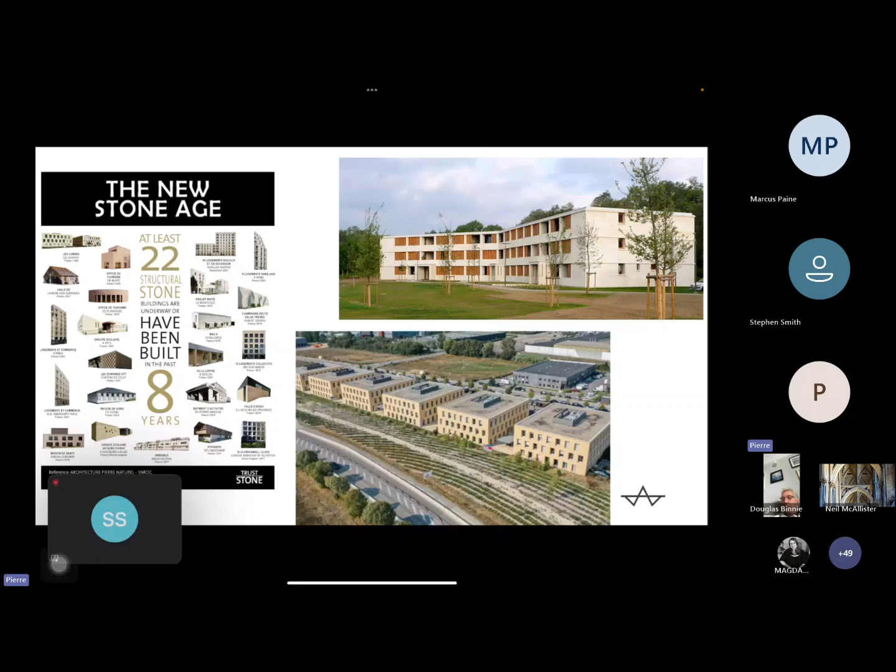Here again, a few affordable projects in France and Switzerland. In Switzerland on the left-hand side, and on the right-hand side below, it's one in Spain. So community centers, as I was saying, but also office blocks, affordable housing, research centers. All those are buildings made of natural stone as a structural material. So very, very little concrete overall.

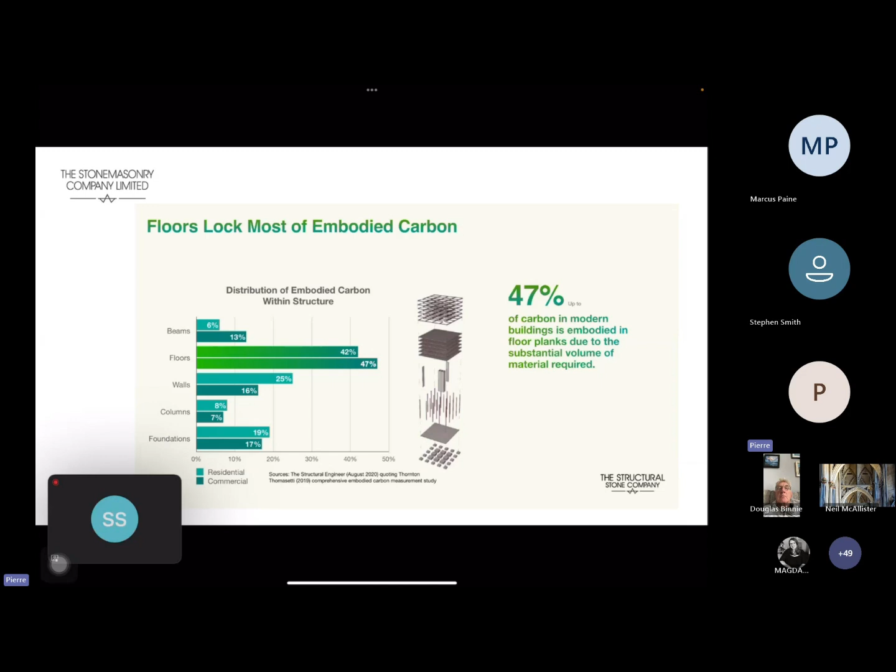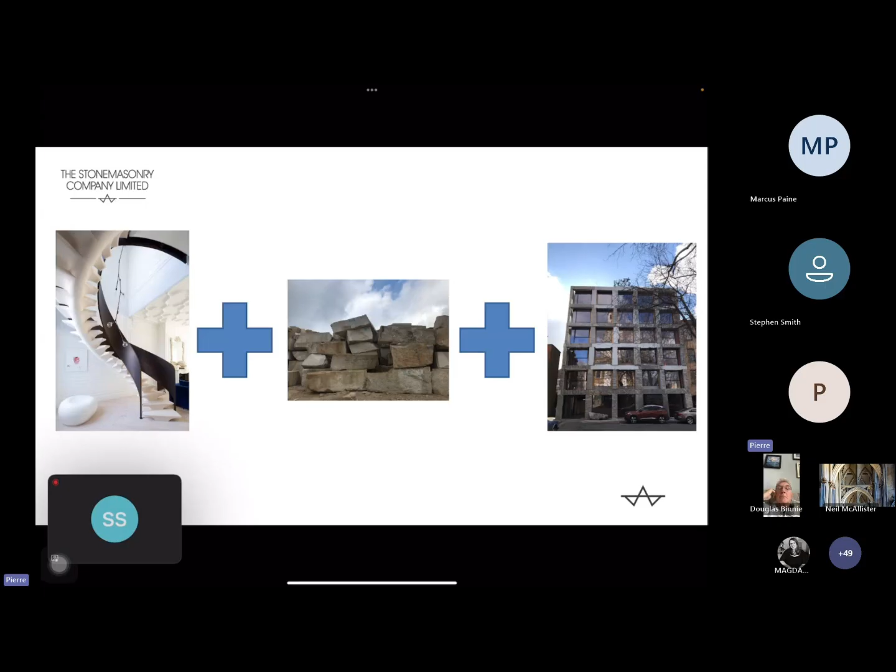post-tensioning and reinforcement, take all the wonky vegetables that nobody wants, all the unloved stone, add the rationalization of architecture of modern time. And with this sedimentary stone, with those fossils, and that artificial compression, very much like an engine made much more efficient in its use of fossil fuel, why don't we use less fossil fuel, a lot more fossil, so that we can supercharge our buildings? So I hope that was not too much of a long exposé on what we are trying to achieve.

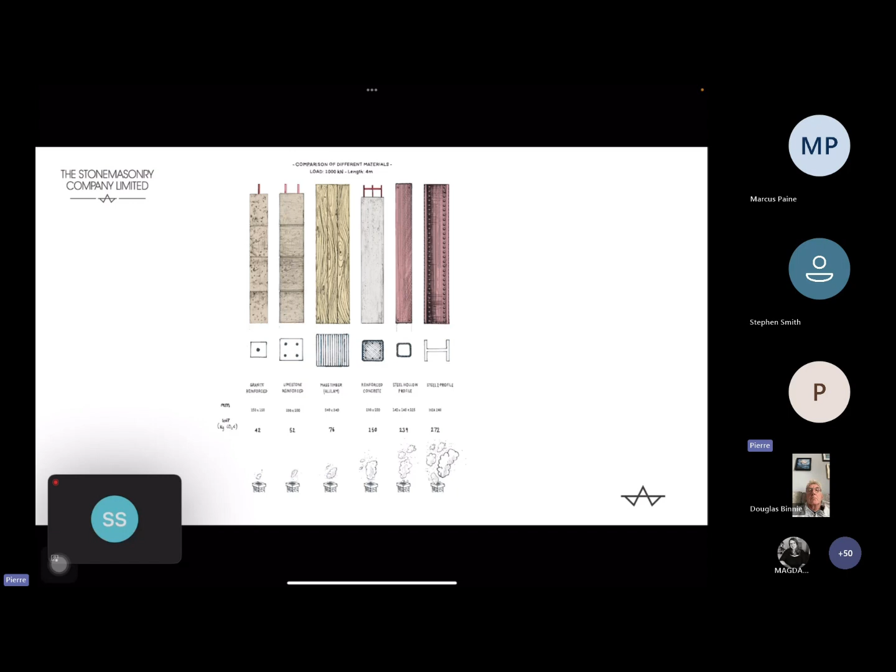But the fact is that we believe that by prefabrication and reinforcement of stone, we can come up with a system that could be also extremely economical and saving space in its footprint, and of course being very resilient and bringing a longevity that some modern buildings cannot.

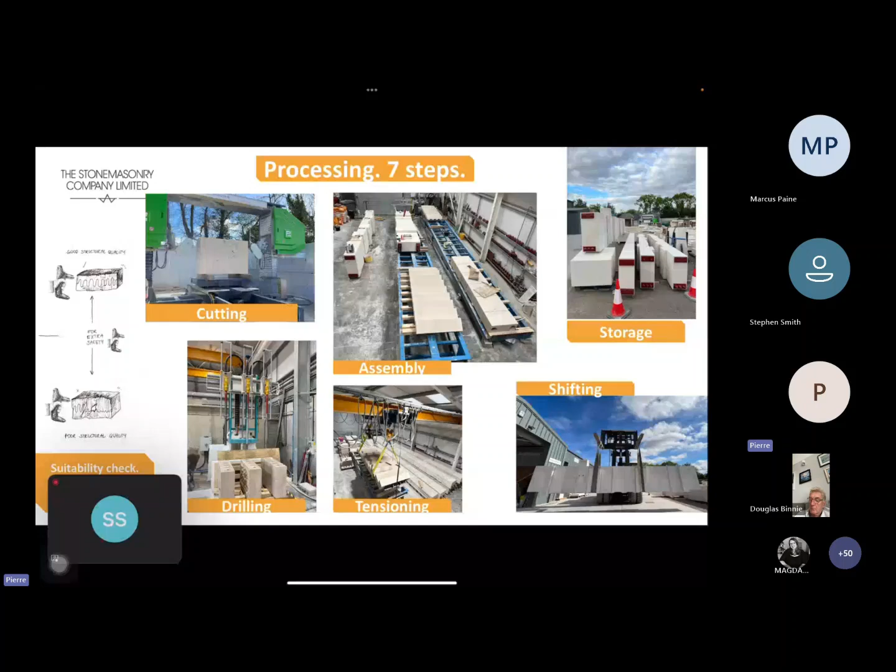So the processing of reinforced stone, as we practice it at the moment, is very simple. We just check its integrity and capacity. We cut it, we drill it, then we bring it on our assembly line where we reinforce it with rebars. We tension it and then store it and wait for the order so that we can ship it and send it on site. So the system is very simple.

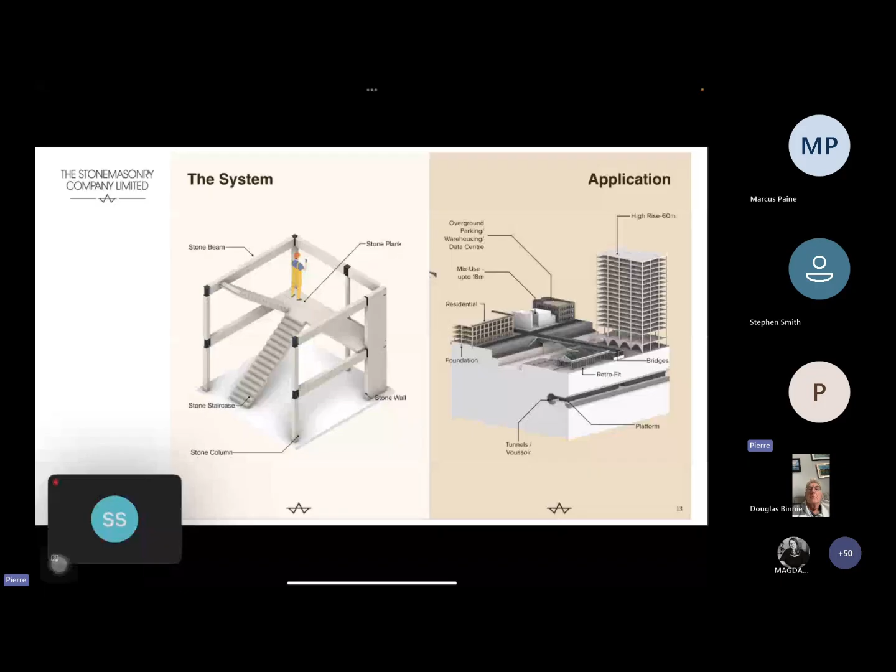We just want to give the architect and the main contractor, as well as the engineer, a sort of kit toolbox where you would be able to pick up your beams, your floor slabs, your columns, have them linked to each other by using mechanical fixings, very similar to what is done in the CLT industry, so that you don't have to be a stonemason to fit those structures. And the hook time in the lifting of one column is 3 times quicker than just lifting one stone after the other to create that very same column.

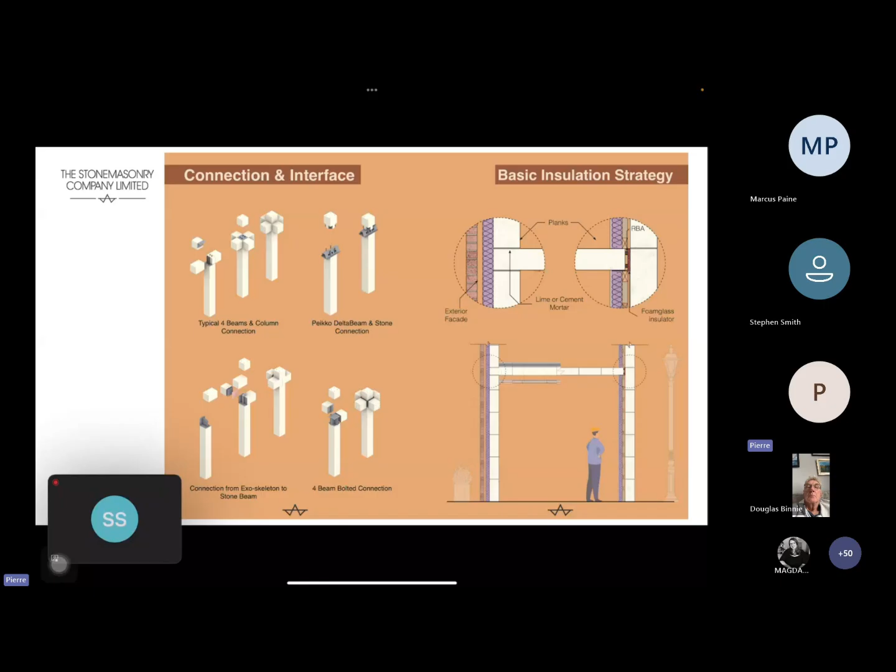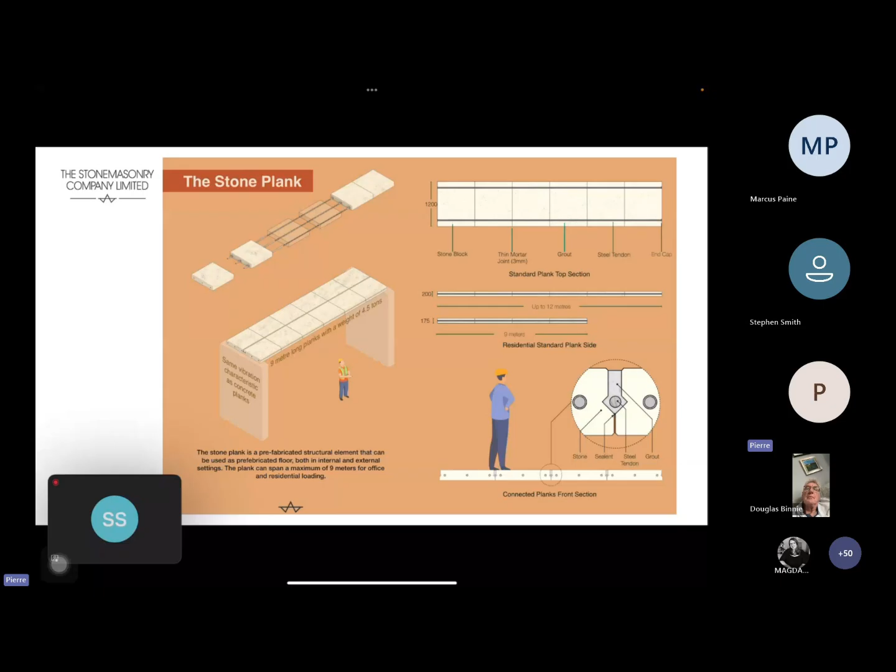As we are pushing for the use, as well as because of course most stone is fireproof, and as such offers a very interesting alternative to CLT floors in some cases. The prefabrication, again, is to speed up the construction process.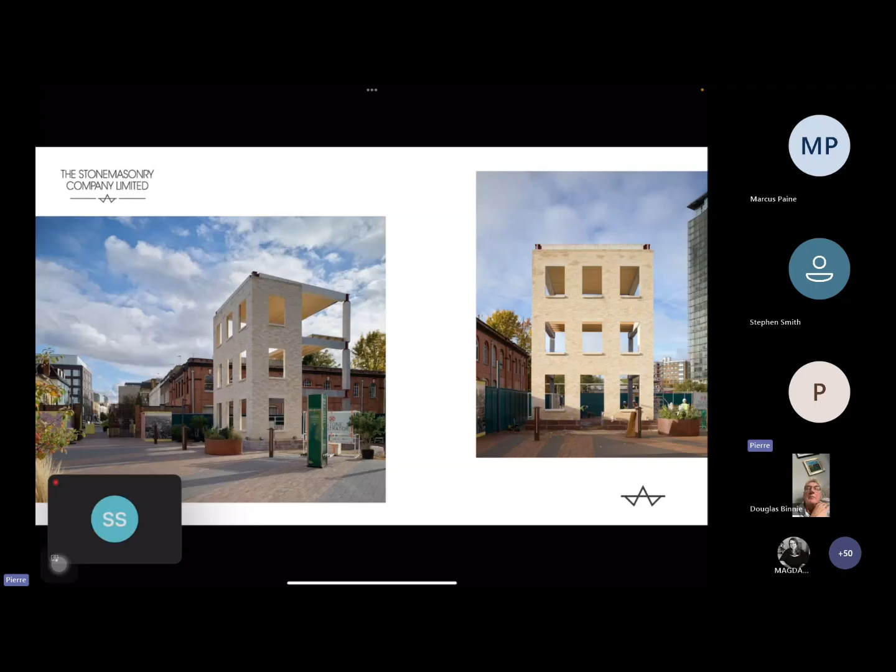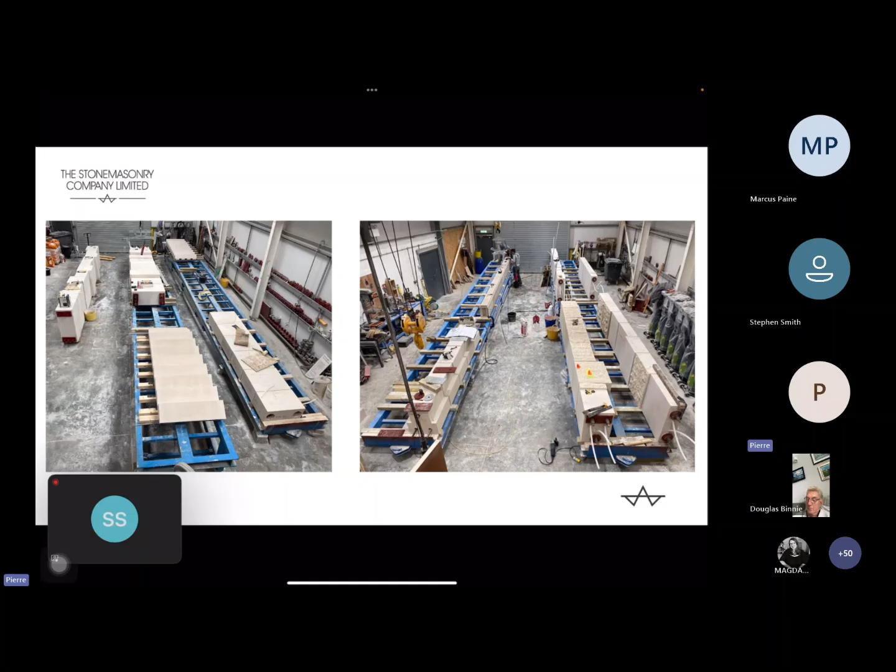And as Marcus was saying, we are very pleased to have done this now, along with some stone suppliers in Europe and the UK, proving that those materials are worth looking at again. That beautiful stone material, by prefabrication and facilitating its specification, we can make a big difference in modern construction.

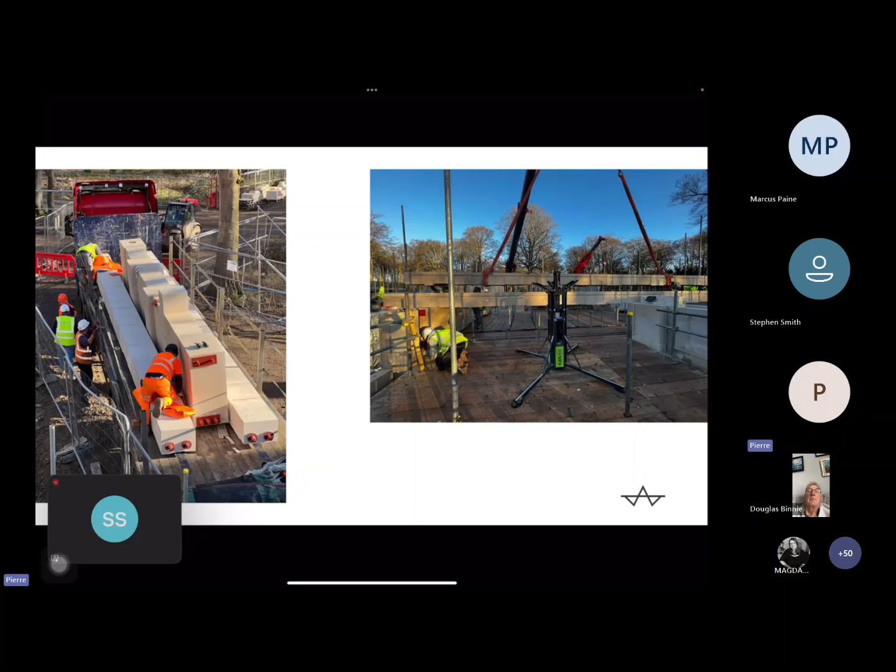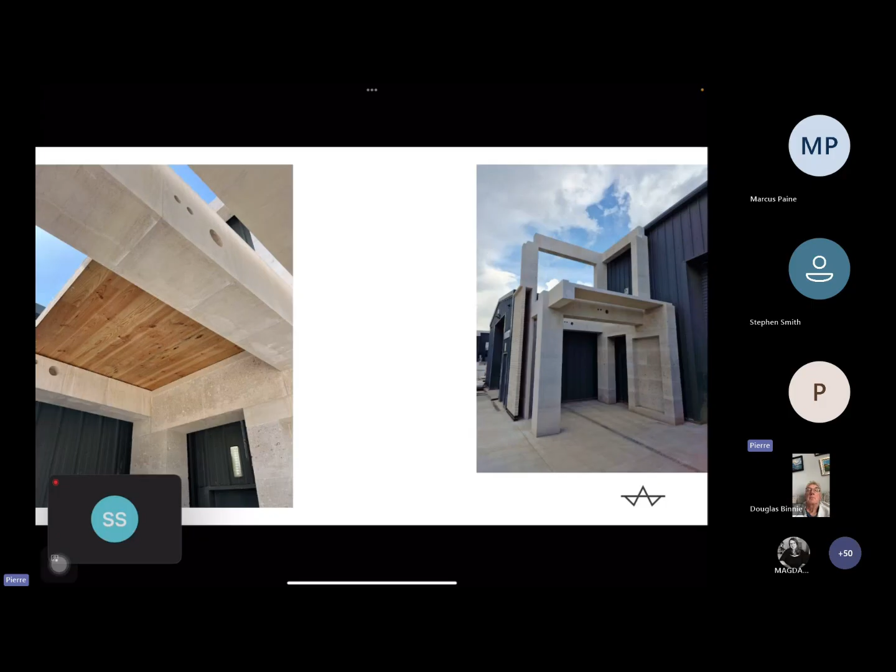You can see here, if you can fit floor slabs in concrete or wood, you can do exactly the same for stone. Here are some examples of stone floor slabs and ceilings, all load bearing, of course. Our prefabricated staircase.

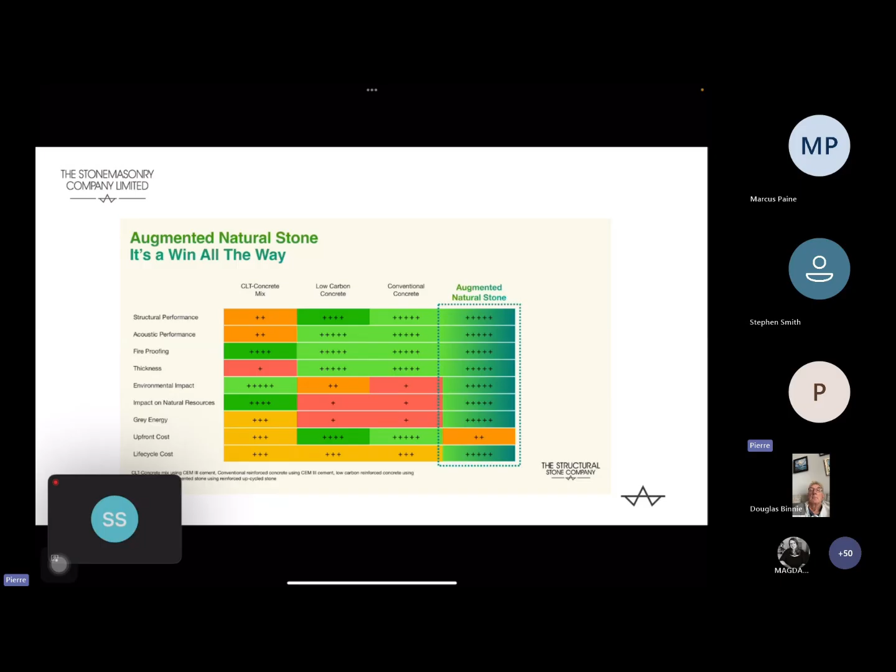If we look at all these things that augmented stone, natural stone can bring, from structural performance to impact on natural resources, fireproofing, I think there is a magnificent case for reintroducing stone, developing some very simple schemes like this one that we are working on in the UK, very similar to the stone demonstrator in King's Cross.

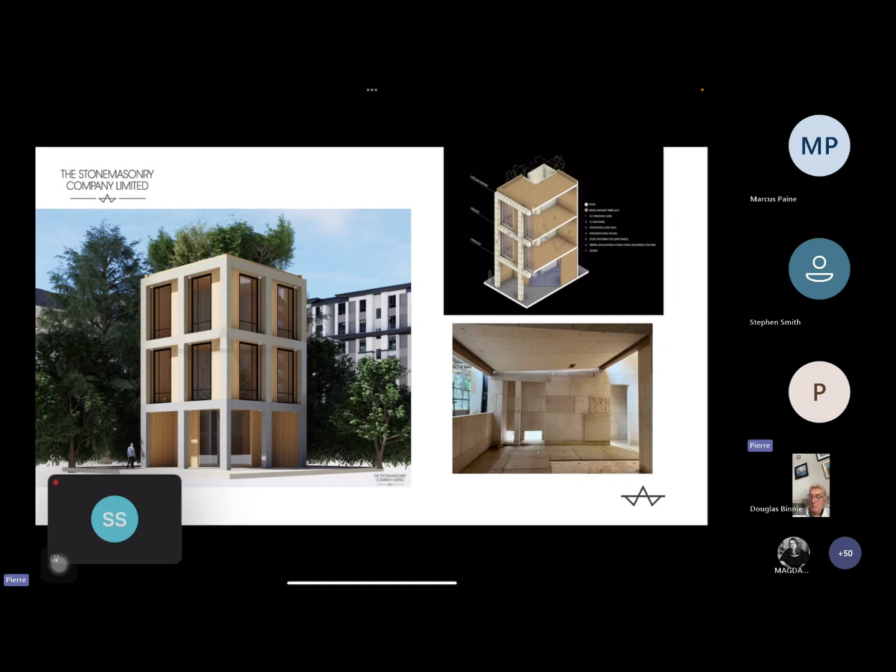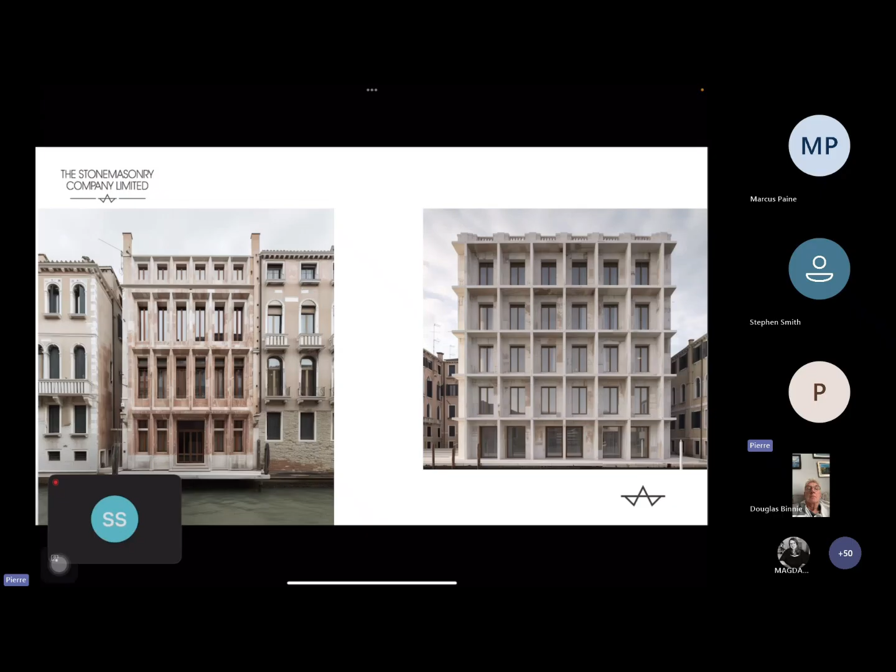And if we could start to see all that difference of colors, of textures embraced by the general public, so that we can accept again that amazing diversity of material, so that we can waste less material, I think that would be fantastic. And we would reintroduce a new vernacular.

As Marcus was speaking of Edinburgh and the north of England, you don't build your granite or sandstone house like you build the one in Bath or Cornwall or Dorset or London. So I think it would be interesting to bring back a more regional identity through the different innovations that can be used between the north, south, west and east of the country.

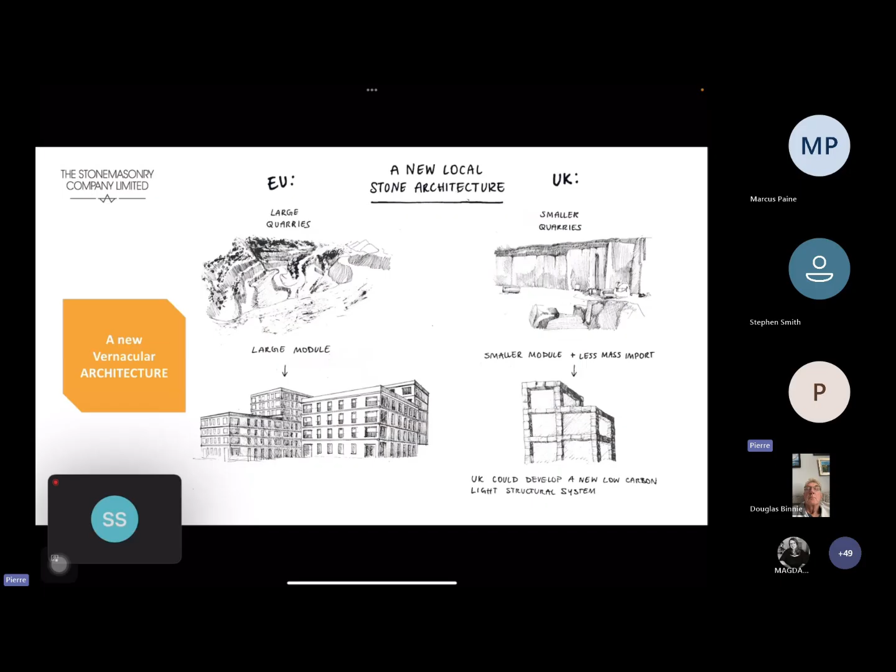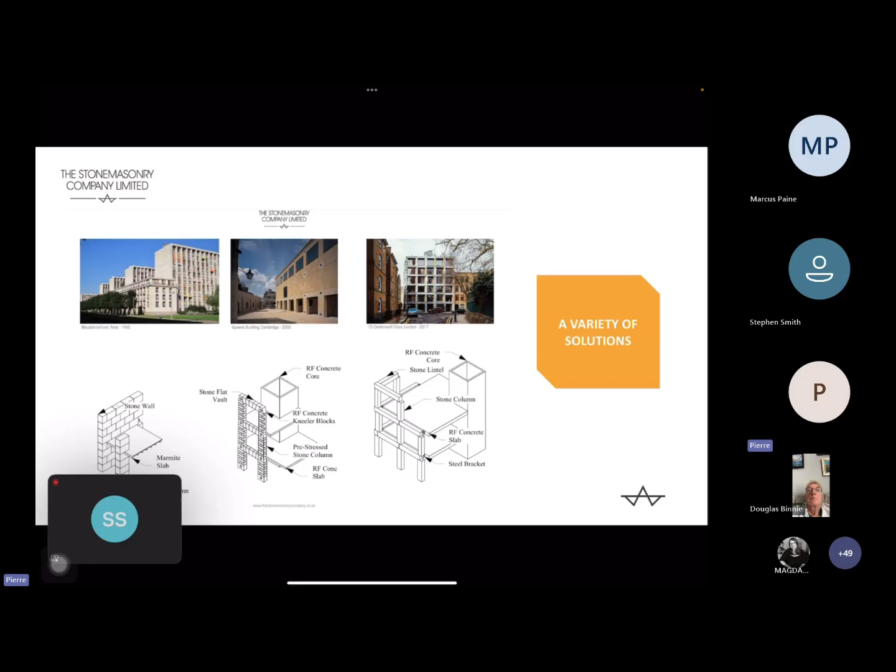There are plenty of different strategies now to use stone, a variety of solutions from exoskeleton to simple reinforced stone columns to stone walls. We do, of course, now foundations in stone. That's something that we can reintroduce. Composite material with waste material from Hutton, all the stone that nobody wants and cannot fit into the brick system.

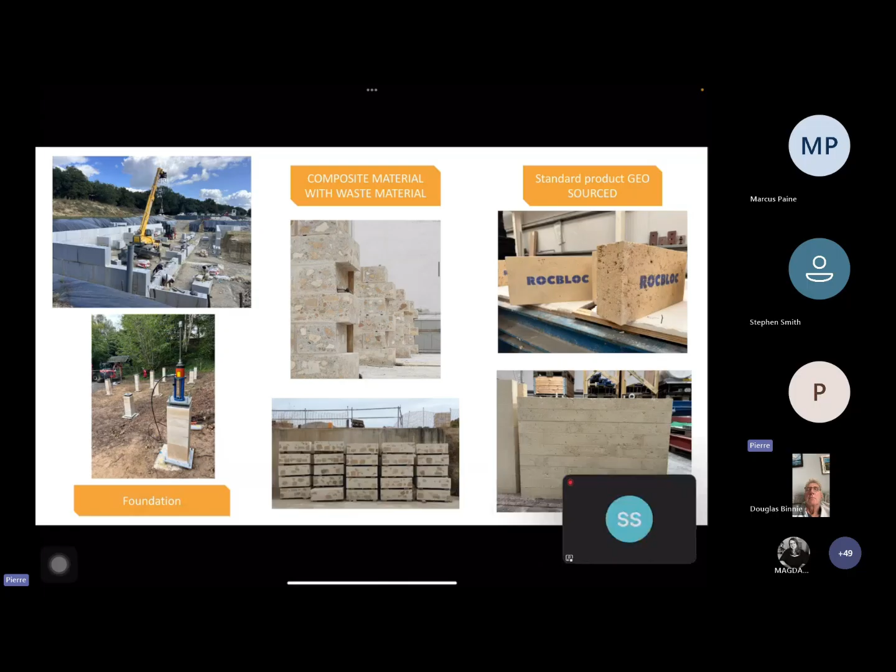Maybe we can use it as a sort of giant terrazzo concrete system. We are developing the geo-sourced ROCBLOC as well, very similar to the breeze block system that is in place.

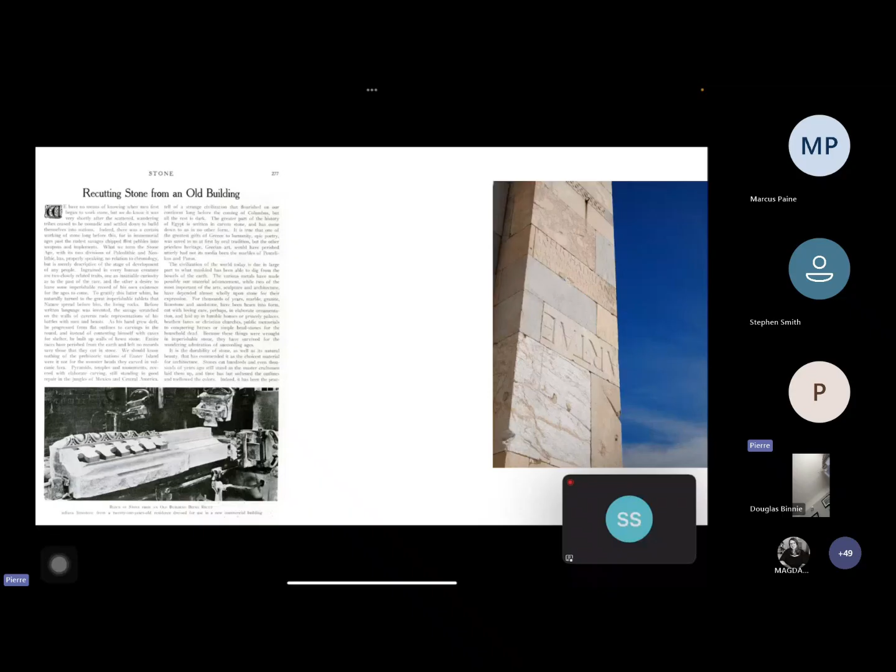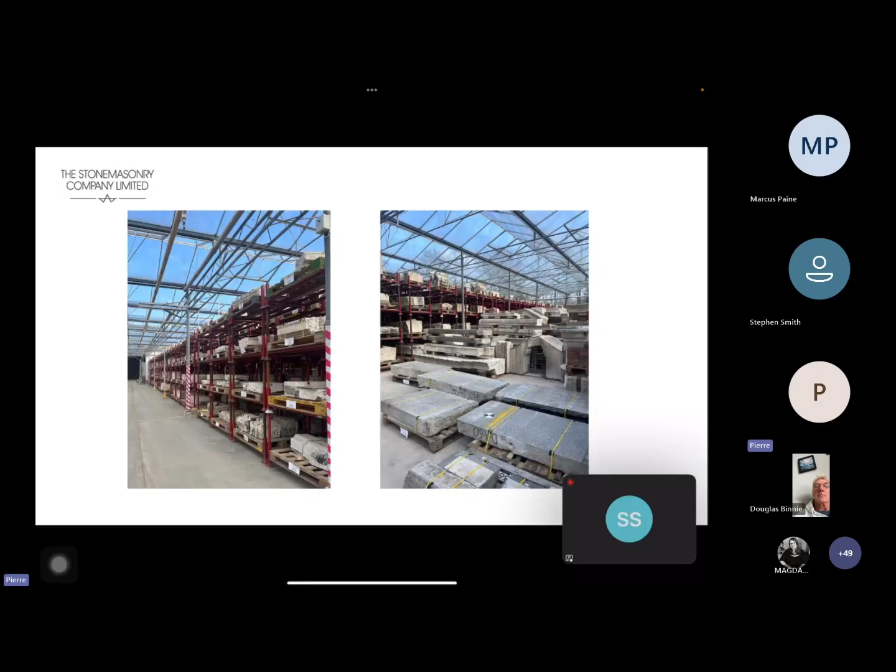I'm going to pass this one, but let's not forget the last thing: when stone is put in full thickness on site, it allows you to reuse it again and again, to pass it from one generation to the next with as little energy as needed. Here you've got, from Paine in London, the spare parts of London. All that stone is going to be reused, again, using very little energy.

And I think altogether, architects, engineers, manufacturers, quarry owners, we could solve a lot of problems before 2030. Cutting emissions of concrete, cutting on sand, cutting on use of water. I think there is so much we can do with that material, and any material should be seen as a sacred material. We should be a lot more conscientious of when we dig, when we grow, what we do with this material.

And I think it's what we are trying to do at the Stone Collective with Marcus and all our colleagues, but also, of course, with our business at the Stonemasonry Company. So here we are, guys.

I'm going to stop sharing. Stop presenting. So here we are.

Thank you, Pierre. That was great. There have been a couple of questions in the chat, mainly related to cost. Obviously, that's the big question everyone asks. The first one is related to general construction methods against steel, concrete, timber, etc., which you touched on a little for France and Switzerland. In the UK, how do you see the costs comparing against these current construction methods?